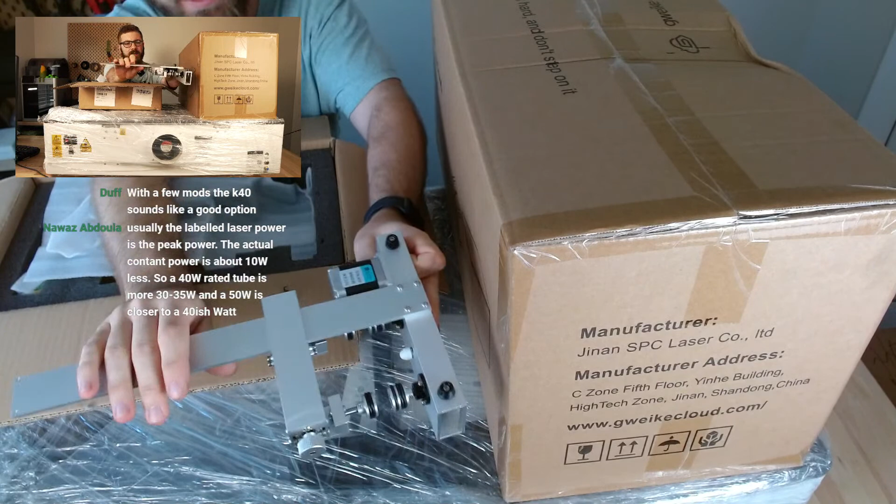Let's see if I go overhead. Nope, that won't work. Yeah, there we go. So, pretty simple looking rotary system—where's the adjust? Oh, here we go. Basically you've got an adjustable slide, so depending on what size tumbler you're using, and it looks like the wheels might be able to come further inward or outward as well. The rotary is something I'll test eventually, but I definitely don't plan on testing it today. Oh, it's actually interesting—maybe this is only a part of the rotary? There's basically what looks like a mirrored version of it in this box. I don't know, maybe they'll have a video guide on setting this up, but that's the rotary—we'll look into it more.

I'm hoping to just cut or etch a piece of wood or acrylic tonight. Oh, okay, this box is super heavy, this guy right here—definitely a team lift situation.

Yeah, so the K40 was a good entry laser, I think. I almost think the K40 to me is like the ANET A8 if we're talking 3D printers—it's not super safe, but it has essentially what you like. It has enough to get you going. Where is my... oh, there's my box cutter.

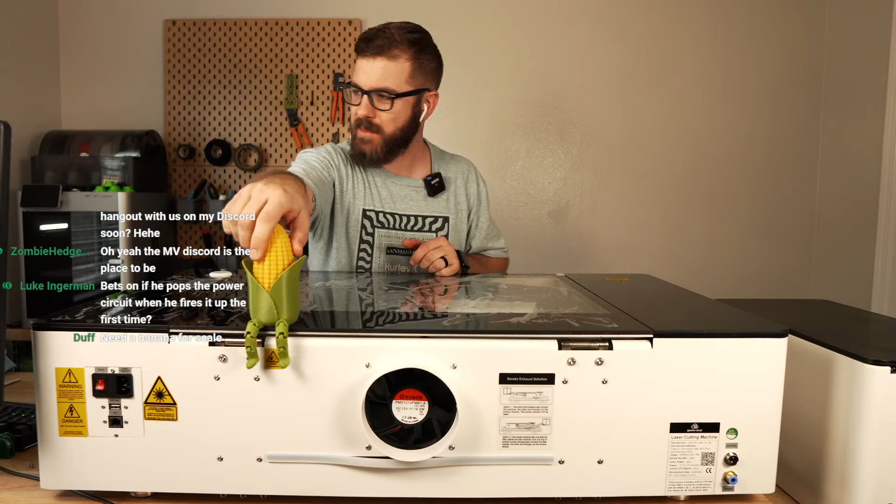Oh no, don't say that, Luke. I'm hoping that the electrical here is really good, considering that this place we're renting is fairly new. But I will say there are times when I run the 3D printers and the bathroom lights are flickering.

Okay, give me a second. The only way I'm gonna be able to do this is if I put stuff up here and go around, because I want to get the other camera to this side so you guys can see from my point of view, but there's just way too much crap on the ground. Okay, camera is coming with me, like that.

Perfect. Ooh, I'm glad I'm wearing shorts. It's hot. Okay.

Alright, so now, nope, that's me. Hi. What I want to do is have it go like that, and then you guys get a gnarly reflection of the light, but hopefully that will be a bit better.

Hey, what's up, BBs? What's the current rating for the power socket? I don't know, Duff. You can focus, yeah, I get really insane focus at nighttime. It's bizarre, it's been like that for a long time.

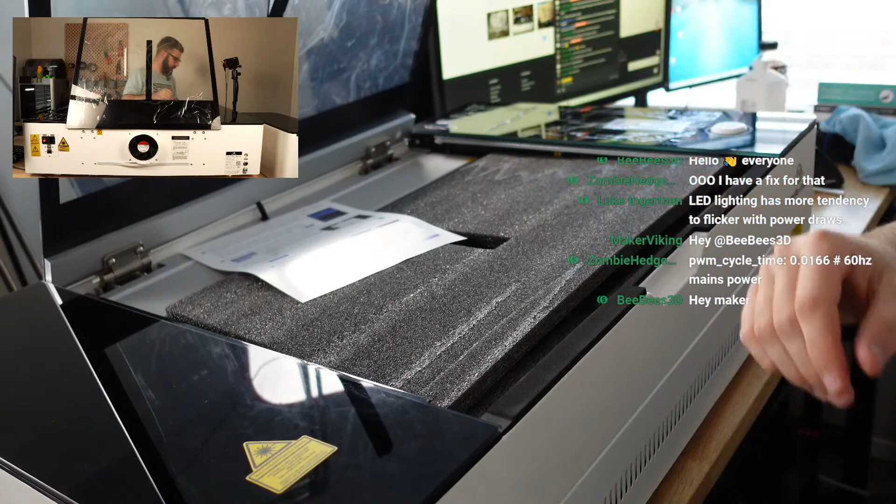Okay, so lifting the lid on this, pretty cool is that it comes with a built-in camera, so it's LightBurn compatible, and I wasn't sure if the camera would be, but it seems like it is, which is awesome. So what you can do, I've pretty much always with the K40 manually focused everything, or manually framed stuff, where you use either a second laser or your laser on a really low power so it doesn't etch, but you can still see a beam, and you kind of manually align things. But with this, granted we'll have to calibrate it in LightBurn, you should be able to place your material in the workspace, have it take a photo of the workspace, usually a pretty wide angle lens, and then overlay your...

Hey! What's up, Tripods? The man, the myth, the legend. He's Tripods, definitely has a ton of experience with laser things as well. Thank you very much, I absolutely will be up for a cold drink after this.

What did Maker say? You're welcome at any time if you should find the time. Thank you, Viking, I appreciate it. Heading home from the office, if you're still streaming I'll be back. Sounds good, G-Funny, drive safe. I'm sure we will still probably be streaming.

You basically take a photo of your workpiece, and then in LightBurn you can overlay your graphic or design, which is awesome. It makes it much easier to quickly align things without having to manually do all that. I think if there's no instructions here, this is just a quick start. We'll take this out so everything, get you guys closer. It'd be so nice to have a ceiling mounted setup, but I think this will work.

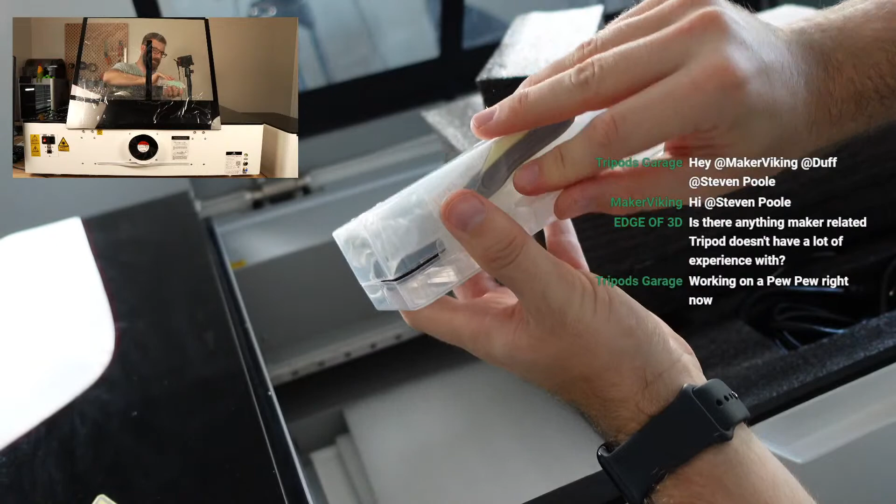You open it, it's very, oh. Okay, this feels backwards, but there you go. So there is, it looks like a jig, maybe for setting the correct height. That's what I would imagine, just an acrylic jig. We've got whiteboard marking. There is a focusing, 63.5 focusing lens assembly.

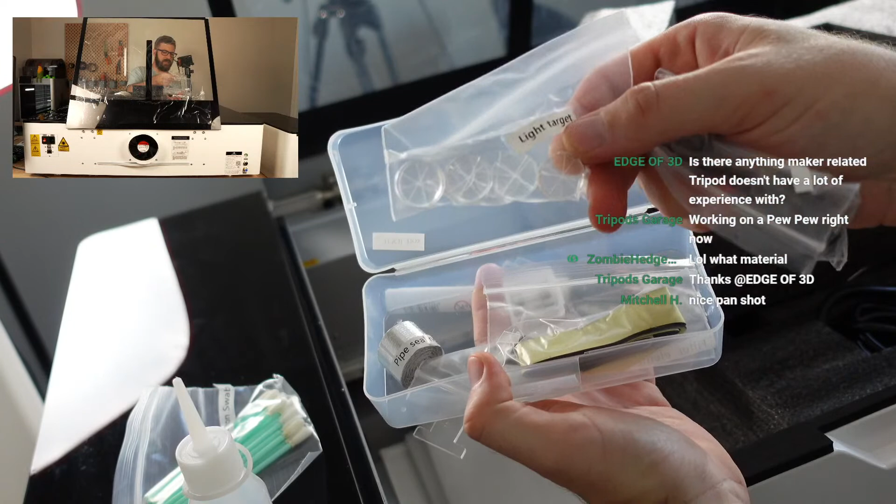Interesting, cleaning cotton swabs, which I'm assuming is going to be to clean any soot off of the lens. We've got oil, pipe sealing, spare fuses. What is this? Double-sided sticky, Allen wrenches, and ooh, this is kind of cool. It says light target, I don't actually know. I thought they looked like replacement lenses, but they all have etches on them. So I'm assuming it's for some form of calibration, probably, but we'll see in a bit.

So you get a nice little container of tools, which will go right here. Oh, did I pan with my head? Oh no, that's funny. One second, let me fix this camera. It looks like the tripod mount is loose, nice pan. It was moving, I didn't even realize it.

Yeah, the logistics of even, I wasn't sure if this was even showing up today.

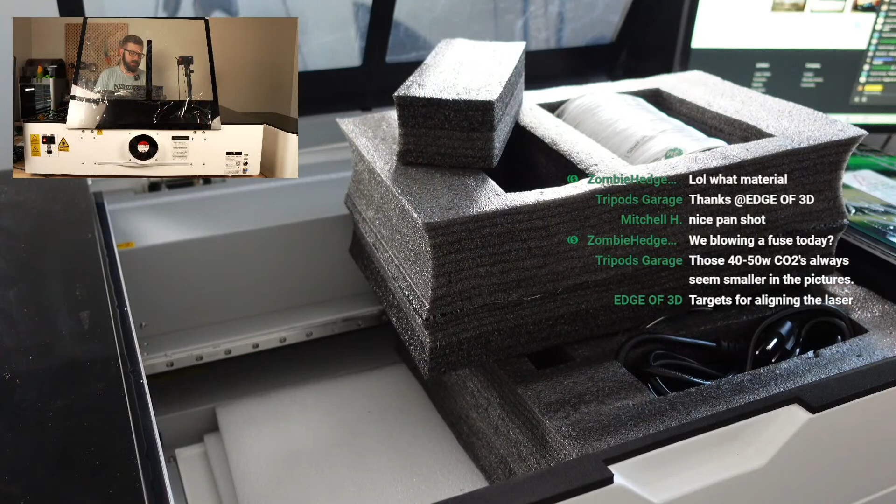Basically, targets for aligning the laser. Oh, interesting, okay. The only way I've ever aligned a CO2 laser was on the K40, and I think it was with painter's tape. That's right, Edge of 3D, you have a big laser, don't you? I used what I believe was painter's tape, if I remember. It's been some years now, and basically I'd tape it to see where the beam was hitting on the mirror, and then I had to adjust it. It was not a whole lot of fun, and I'm not even sure that I ever fully got it perfect, but it was functional, which is really what I was going for.

All right, so there's one clamp, another clamp. We've got tube, we've got Ethernet cable, we've got USB to USB. And we have got, this is, what does this say? Air pump, okay, so this is the air pump cable. I think that's all that's in here. Let me see.

Oh there is, okay, so let me get this guy out. Foam getting out, foam getting out. Okay, so inside, it's all linear rails, which is cool. So we've got, it looks like a single X, dual Y rails. You can see that there, well, maybe you can't really see it. There's grease, the rails are all greased up, but down below in here is the radiator for the water cooling loop.

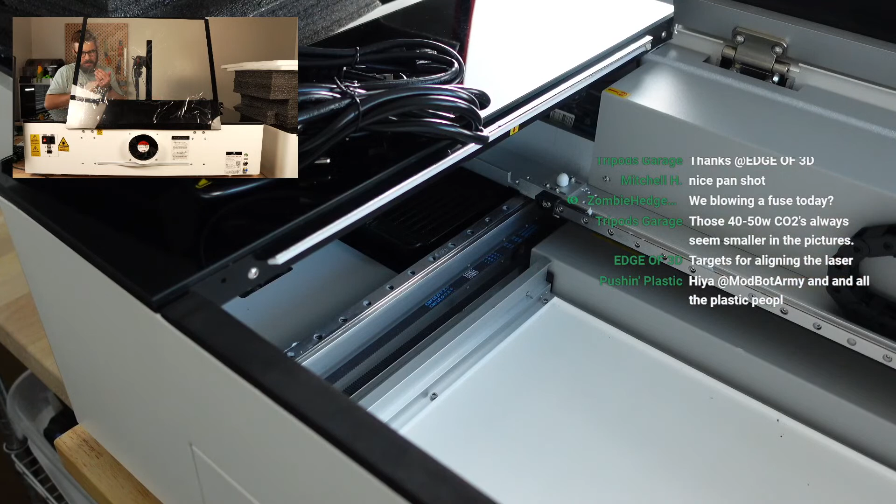Is there anything else exciting in here? Cable chain, stepper motors, pretty big beefy belts. The control board is, someone was asking about that. It doesn't look like there's an easy way to get to it, but the control board or controller is right there. I might be able to, I see a couple of screws on the cover of it, let me see. I'm trying to see. Okay, there's definitely no access on the outside. It looks like it's fairly unibody. Let me move this over here for you guys for a sec.

Hey, what's up, Cool Codes? Those target lenses are light years ahead of aligning with tape, just wear your glasses. Oh, interesting, okay, sounds good. I don't know that I have glasses for this, but if I'm not mistaken, for CO2 typically any glasses work, right, since it's an invisible light source. If I remember before, I just had like polycarb glasses, so I should be able to just wear any of my diode or fiber laser glasses.

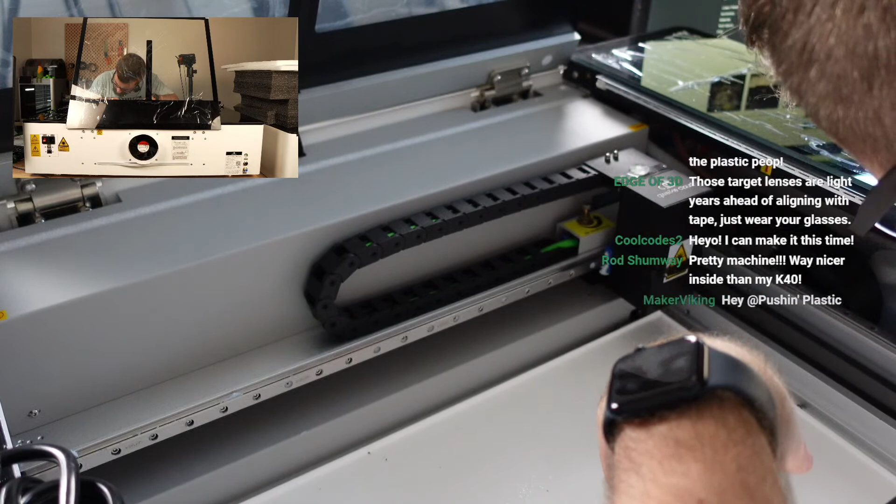So there's no, I was expecting some form of flash drive or something, I guess we'll go on their website and see. I do know from watching videos prior to this that the bed, yes, there's a big oval on the ground. I do know that this pulls out, I believe.

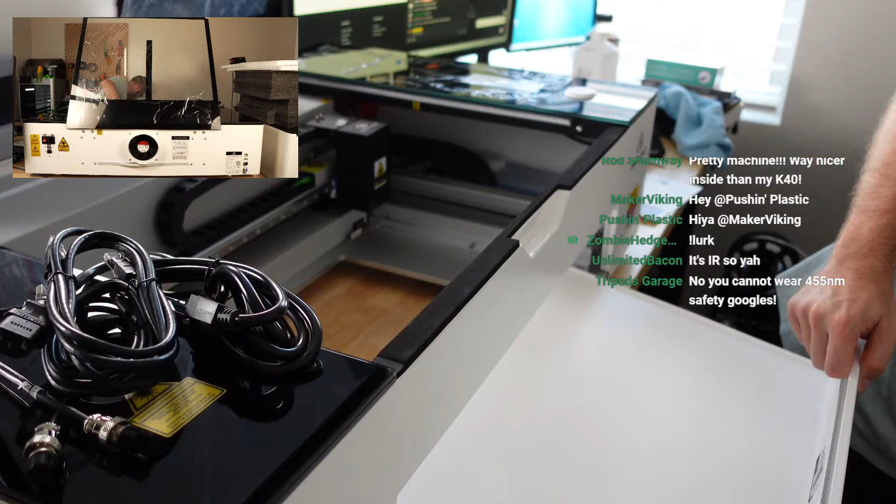Yeah, okay, so this guy slides out, and then the bed, which it does come with a honeycomb bed, pops in right here. Maybe this needs to come all the way out. Okay, so that slides in nicely. This slides in. Ta-da! We did it!

No, you cannot wear 455nm safety goggles, totally different. I thought I would get laser specific, but the cheap ones that come with diode lasers are adequate. Totally different spectrum, it's IR, so yeah.

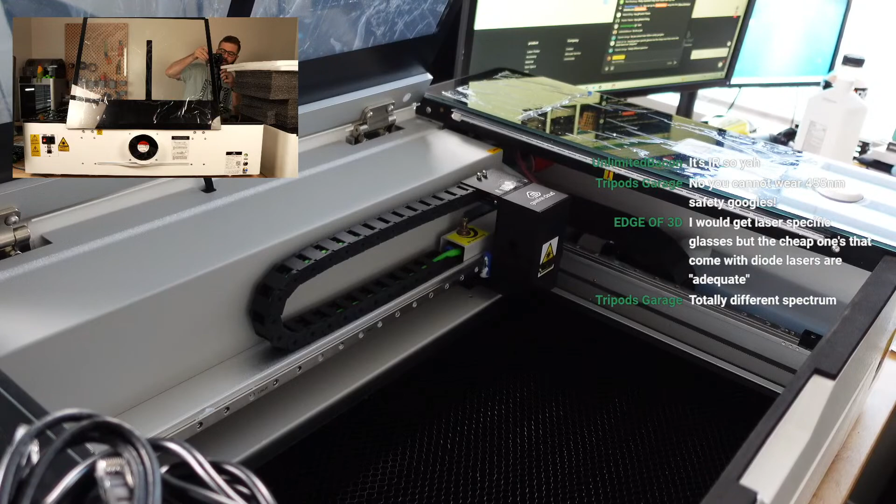I thought, because it's been a long time, I haven't really played around with a CO2 laser for years now. It's been in storage for 2 years, the K40. But from what I remember, everyone online was just saying standard polycarbonate safety glasses are fine. Basically, you just want something that doesn't have an opening on the sides because it's an invisible light spectrum, you can't see it, so you don't need any special shade.

And you basically just want a physical cover, which is why when this is closed, you don't need glasses, although this is just glass because it's not able to, like it would have to burn through this in order for it to get in your eyes. That was my understanding.

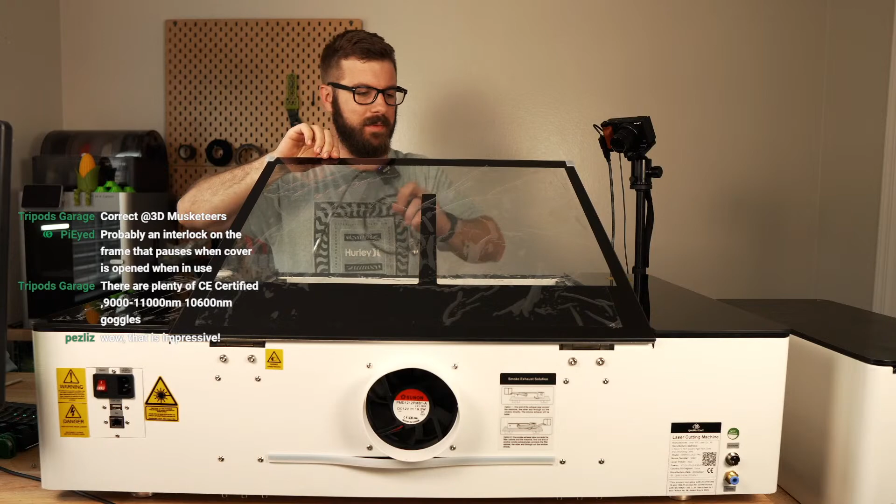I had a printer that showed up maybe a year and a half ago that was really large, and so I got it out of the box. All of the box and foam and stuff was in the living room, so I instantly had to get it out to the trash. I was going through the setup guide, and it was supposed to include a powder coated PEI bed as an extra, and a USB flash drive with some info. I thought they forgot it, but then I went out to the trash and it was taped to the bottom side of some foam. So I'm glad it was here, but that's something I've learned now - to really look through all of the foam, because sometimes stuff is just super well hidden.

Okay, so let's see if we can start. I'm playing around with the HDMI cable so I can get you guys on this side a little bit closer. I can't see chat right now, so if anyone's saying anything I can't read it, but okay, let me come around to this side.

Cool, I'm just thankful it was here because it's such a small thing, but it would have meant we couldn't really have done anything. Okay, let's go side cam. So we're just gonna quickly plug these two things in.

I did notice this beforehand, but the length you have is not very long, so this unit has to be right on this side. Because of how long this is, you just have to make sure you have a really long workbench or enough depth where this can sit behind it. Because the tube is gonna be connecting, even if you're filtering it outside, if this is where the air assist is, you need the side unit. So you just have to make sure you have a pretty long table.

Okay, come on threads. Is it me or is it the threads? All right, well that's about as far as we're threading it right now.

And then we do need to set up the exhaust tube as well. Hey, what's up, Zen?

So let's see, let's go desktop. Connection of exhaust port and air pipe - connect one end of the other pipe there. Okay, so it looks like it goes from machine to the top of that unit. So let's grab this guy.

Do I have a Phillips? Okay, I do somewhere, yes. Switch over here for a second.

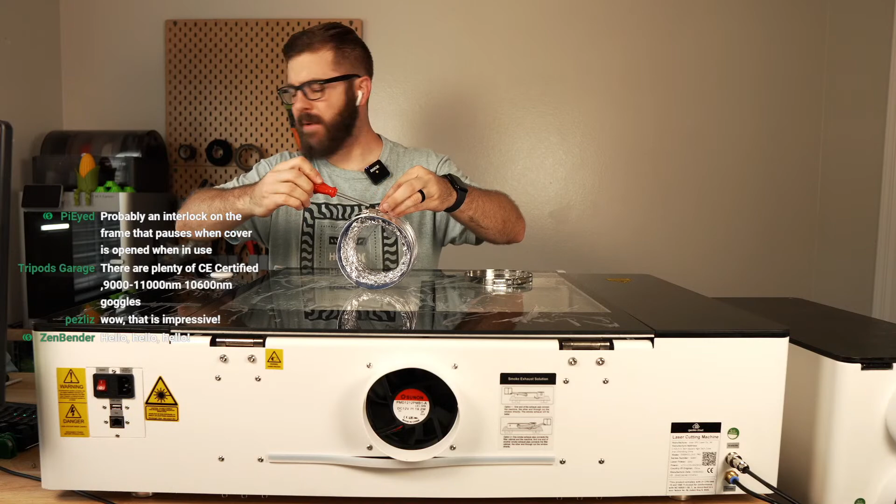Do you have, right now, tripods, do you have a CO2 laser? I know you have quite a few fiber and diode lasers. I wasn't sure if you had something like a K40 or...

Yeah, the side filtration's cool. The only thing is if you were someone that doesn't plan on using a filter, if you just wanted to exhaust it outside, you still have to use that unit beside it because that's where the compressor is for the air. So it does add a lot of size to it, but it's a really clean, very clean looking setup. And it is cool that it comes with it, because originally I wasn't sure if it was an extra cost or something like that.

Okay, let's put these clamps on really quick. CO2 is the only laser I didn't... okay.

Actually, I know you have quite a few fiber lasers. And I know you have a lot of diode lasers because I've watched a bunch of your diode laser videos.

All right, let's see, actually let's go. I need a remote almost to change scenes. Okay, so let's see if we come around to this side. It's like an obstacle course in here. Cool, that fits perfectly, as it should.

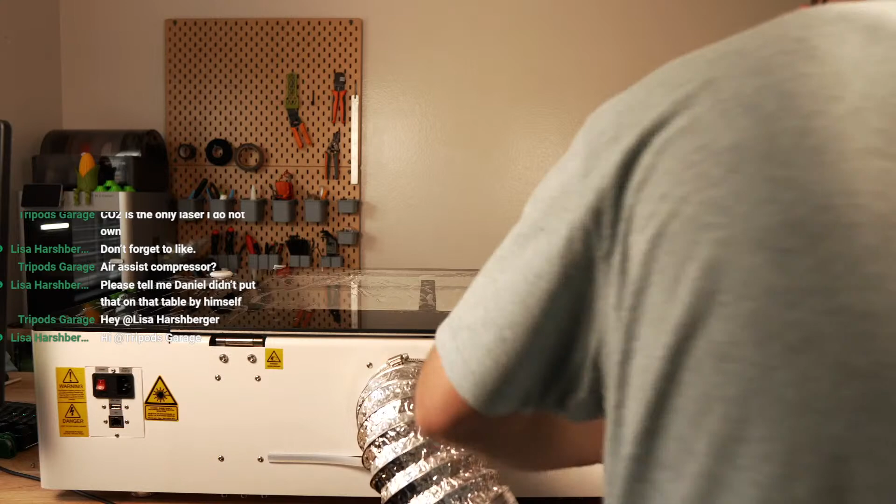When this goes out to the garage, I'll correct it a little bit more, but I already see right here, I don't think it was from me, I think it was from shipping. There's a tiny little hole in the tube, which kind of sucks. And then this is gonna go onto the other side.

Interesting, this other side feels like it's much smaller. Yeah, this other side's much smaller. I wonder if I'm using an incorrect tube. No, they're both the same.

All right. Oh. Let me switch you guys over to this camera. Woo. What's up, Steve?

Just, oh, that's a lot of tube. Just sweating and moving around this obstacle course. I wasn't sure this was going to be tonight either, actually.

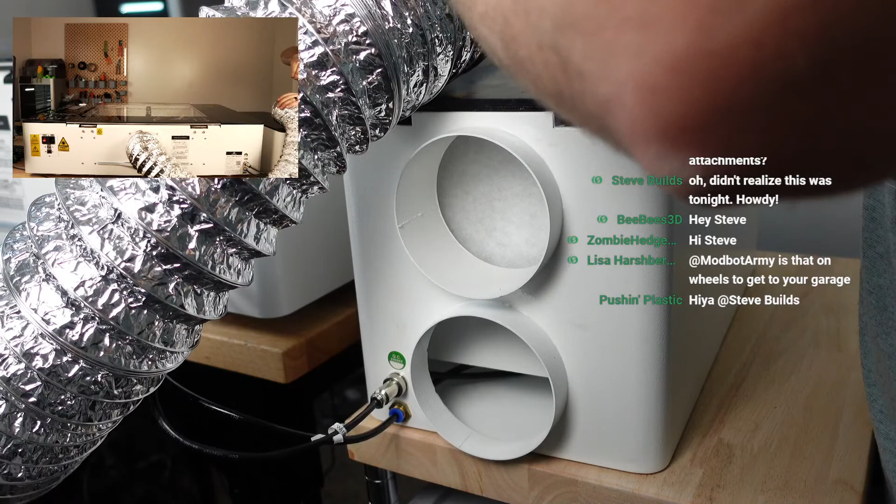And then today when the guy was coming to drop it off, why is this not... When the guy was coming to drop it off today, he called me and read off my address, and I said, that's not my address. So I don't know if it was the manufacturer or if it was the logistics company, but somewhere along the road, the address got changed, and the address that it was being delivered to was like the neighborhood up the road. It's so weird.

It feels like, is it my screwdriver? Could be this chintzy screwdriver. Okay, we're gonna rock with that for now.

When it goes to its final destination, I'll try to clamp it down a bit more. But yeah, I was very thankful the delivery guy called me this morning and said, hey, are you on a long gravel driveway? It's like, no, we don't have any gravel here. And so I would have been really bummed out.

Okay, so we've kind of sort of done that. Connection of exhaust port air pipe, connect one another.

All right, we're gonna power this on. Take everything out of here. Where are the, I just realized, like, where are the USB? Is it on the back of the machine? Oh, it looks like it is.

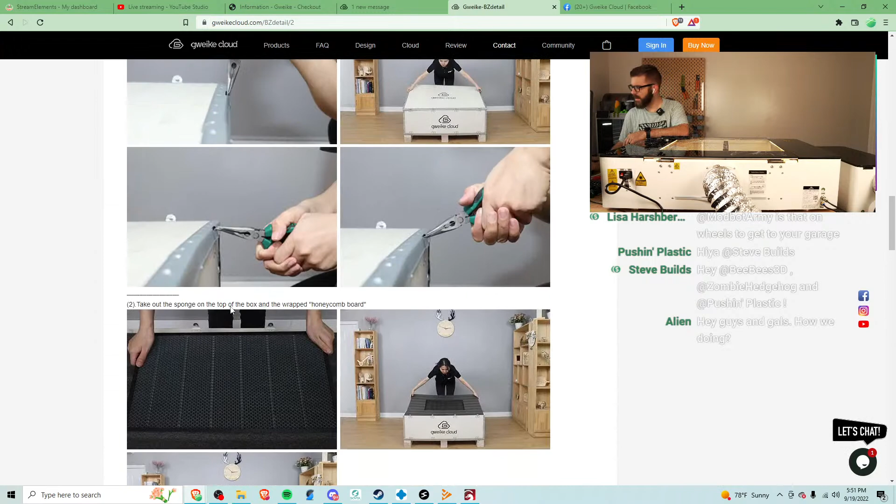I don't know how loud that is to you guys, but it is very loud here. Connect one end, plug in the power cord on our socket. Okay. Laser's moving.

I feel like that shouldn't just be on. Okay, your first prints and more. Yeah, the lights kicked on, the compressor kicked on. Everything's on.

Yeah, this thing is huge, alien. It weighs like just north of 100 pounds. It is a monster. I guess we can start using their thing really quick just to make sure it all works. So then I really want to see if we can get it hooked up to LightBurn.

Device, let the machine connect to the network. Actually, let me... It's weird to me that the instructions sort of stop there.

Unboxing and setup. So we unboxed it. We plugged everything in. And that's it. You just plug it in and then you're good to go. Unboxing and setup, learn by doing.

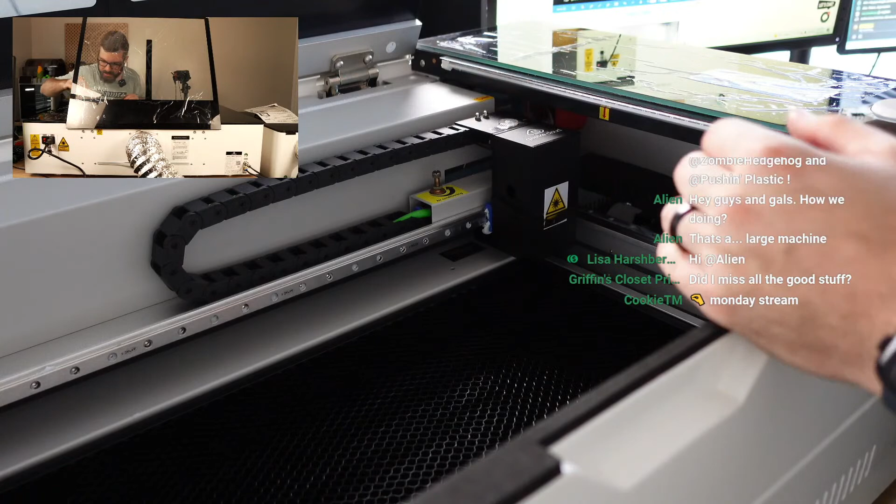Inside here, the things I'm curious about is there's no mention of a few things. So when this turned on, for starters, there is one of those little alignment pieces just taped on top of here. Okay, so that must mean they're saying they aligned it because it's basically charred. So I think that's what they're saying, is that they've already tested the alignment for this, or it was aligned at least before they left the factory.

Yeah, so if you look at the target, there is, it looks like a mark right in the center of the target, or roughly the center of the target. So that's fine to remove, I think, hopefully.

The things I'm unsure about is there's a switch down here. Let me see if I can zoom in for you guys. Okay, there is a switch down here that says air conditioning. So I guess it's air assist, I'm assuming. They're calling it air conditioning, but this is, you can adjust the flow through this right here. So we've got it, I guess, fully open. And then there's also some form of a digital reader here.

When this turned on, it output something. So let's turn it on again, I suppose. Let's flip the switch. Okay, so it lights up. I don't know how well you can see it. It says ZYE, Xi, laser power. So maybe it's a power reading, like it tells you the power output.

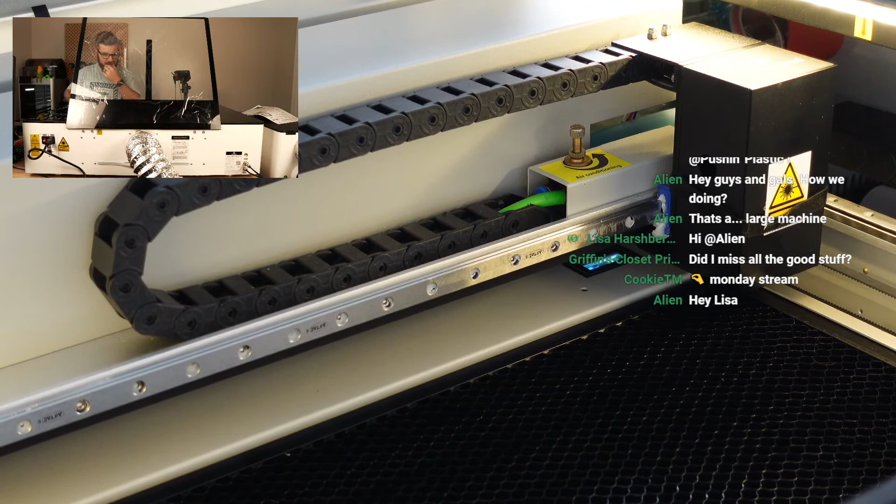Yeah, super loud. Oh, there's also foam still, foam packaging inside here. Okay, so all the foam's out. But yeah, I just feel like it shouldn't be turning all that stuff on until a job's running. At least that's my assumption.

So let's try it with their stuff really quick here. Let's use the computer and go to Gweikecloud.com. I'm wondering if once it connects to the software, then it'll be smart and not just run the air compressor.

Hey, what's up, Jerry?

Then it says sign up for Gweikecloud. So yeah, we'll start with their cloud stuff. Email. Don't have an account number. Create one now. One second, y'all.

How loud does it sound for you guys, out of curiosity? Because I know we have a noise filter on here, I think, from when they were doing construction.

This code will be active. Email code error? Oh. Don't play with lasers, alien. Okay, so it requires you to get a code to your email. I'm gonna grab that really quick. Oh, it just came in. Cool. Code, cool, confirm.

Gweikecloud, air compressor always on. Oops, I pressed a button. I pressed the button and the laser's moving. This is going great, as long as it doesn't start actually engraving, but the button did a thing.

Okay, I'll have to find out about that later on. Let's just plug it in. Let's plug it in and see if we can get LightBurn running on it.

All right. USB cable. Nope. And USB cable. Okay.

Well, would it turn off if I close the valve? That's a great question. No. I mean, it might — what I think it's doing is it's preventing it.

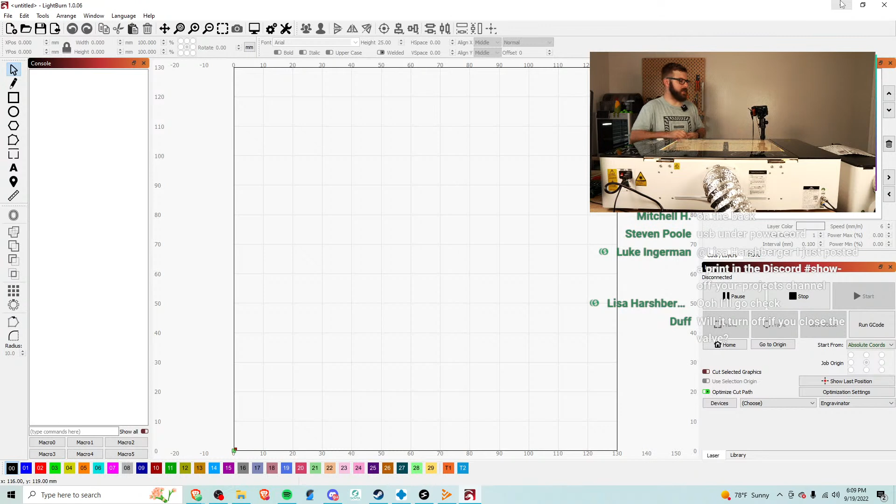Oh, these clips also need to come out. I think it's preventing it from having nearly as much air coming through it, but it doesn't actually flip the switch. I feel like there should be a way where when the laser tube is going to be kicking on, that's when that should all kick on. But maybe it's not the case.

Okay, so I don't think that I have — let me see, let me update to the latest version. I don't think I installed the driver. So this has a — if it's showing up as a... oops. If it's showing up as a Ruida controller, then let's see. There's a driver that I'm probably gonna have to install, and I don't think I've ever done it because I haven't had any CO2 lasers.

You could— I probably could sleep on this if I curled up real small. All right, so installing the latest version, and then at the very end of it, install FTDI serial driver. That is what we need. Yes, extract.

Cool, all right, hopefully this just shows right up because I believe... Oh, interesting, they have a driver. Oh, maybe I'm doing it wrong then.

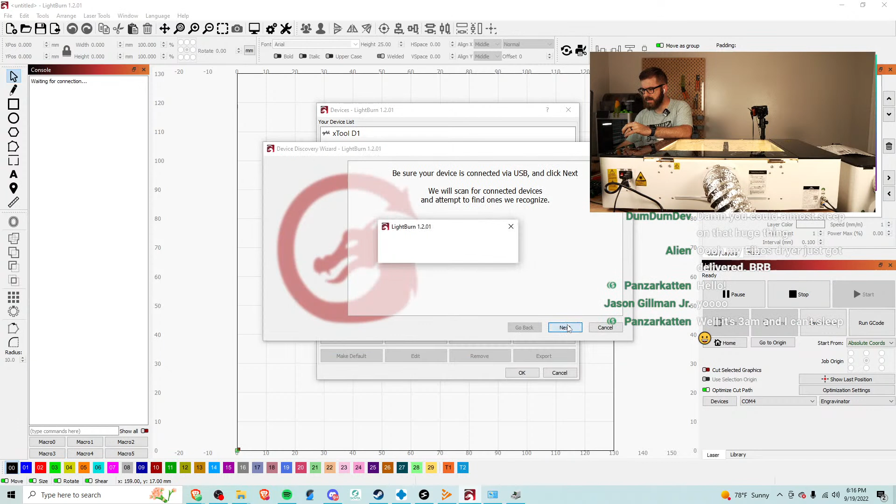Hey, what's up, Jason? Okay, find my laser, next. It is not finding my laser. Why? Let me try a different USB port.

Oops. USB. Really looks correct, I don't know.

It's 3 a.m. Oh my gosh. Yeah, I'm trying to get it set up.

For some reason, I don't know why LightBurn's not picking it up. It looks like it should show up as a Ruida controller. I have it plugged in via USB.

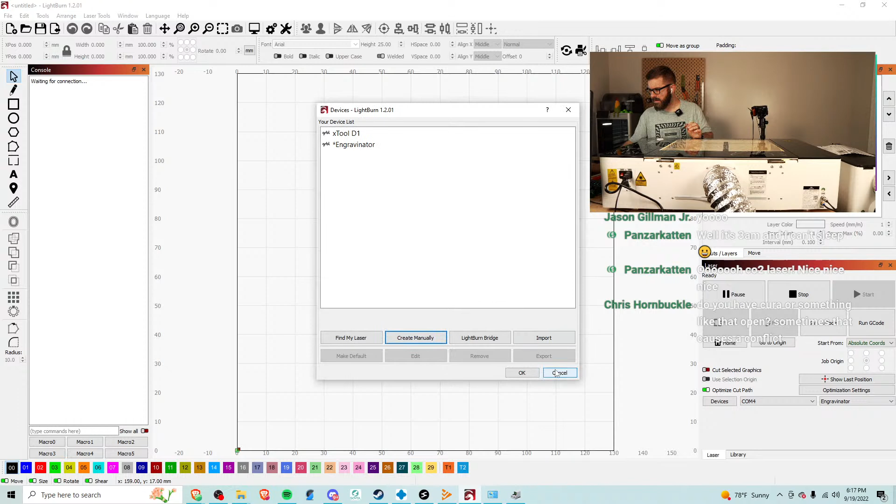Oh, you might be right. I have a bunch of stuff open. Let me see here. Close, I have a bunch of, it's all resin slicer stuff. Let's see, I'd rather not close that one if I don't have to. That's a really good point. Let me see if I close up this stuff.

Did your dryer come with a power cable? Mine didn't, it's running off an external power brick. Mine came with a power cable. Mine definitely came with a power cable. It was just a cable.

I don't remember it being. Was it a brick? It's in the garage. I can check after if you want. Or is it just live voltage? Yeah, I don't remember mine having a power brick. I thought it was just live voltage to the box.

Okay, so this is not working. One thing I'm curious about then is my laptop definitely has LightBurn on it as well. So I want to see if it's something with this computer or if it's something with like a driver.

If I can't get this right now, then we'll go back to trying their cloud. I'm sure once I get it, it'll be simple, but I actually haven't set up a CO2 laser in LightBurn. Let's see if this works.

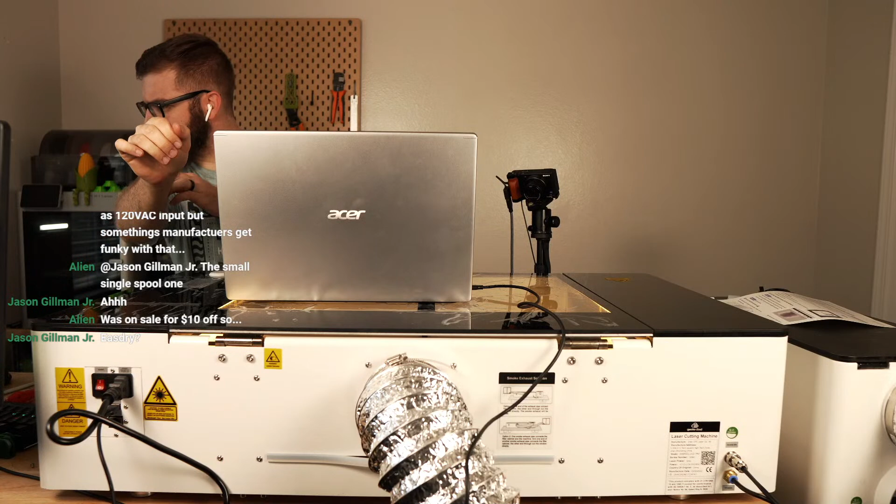They got rid of the power cable. No, it should have. I swore it came with a fairly standard, maybe one of the power cables that has like two prongs on it.

Okay, so this is not ideal. Let's just see. Okay, so let's install.

Okay, we're installing the driver. All right, will it find it?

Find my laser. Yes. No. Okay, so I don't think it's LightBurn then. I think it's either the machine or something driver related. I'll have to play around with that. I'll have to screw with that on my own then.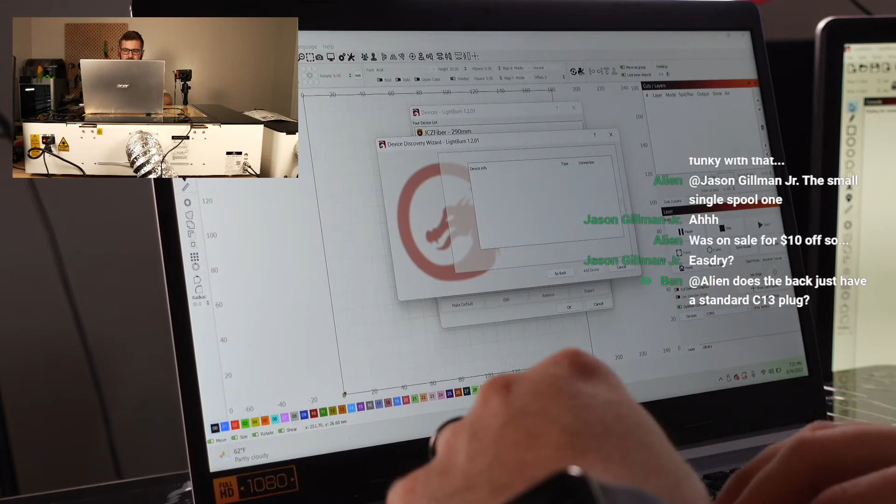I'm gonna go back to the drawing board, which was seeing if we can get this thing on the Wi-Fi. So let me go, let's go back to here for a second. It's been an adventure.

Okay, so let's go back to the cloud. There we go. I'm gonna remove the device that's already on here. Okay, so I removed the device. I'm gonna add it again. Let's see if we can get it to connect on Wi-Fi so we can at least use theirs right now.

Device. Next. Okay, next, hold down the button for 5 seconds. Okay, we got the flashy thing going on again. Please turn on the Wi-Fi of your laptop or tablet, search for the device. When the device display is connected, the Wi-Fi connection is successful. All right.

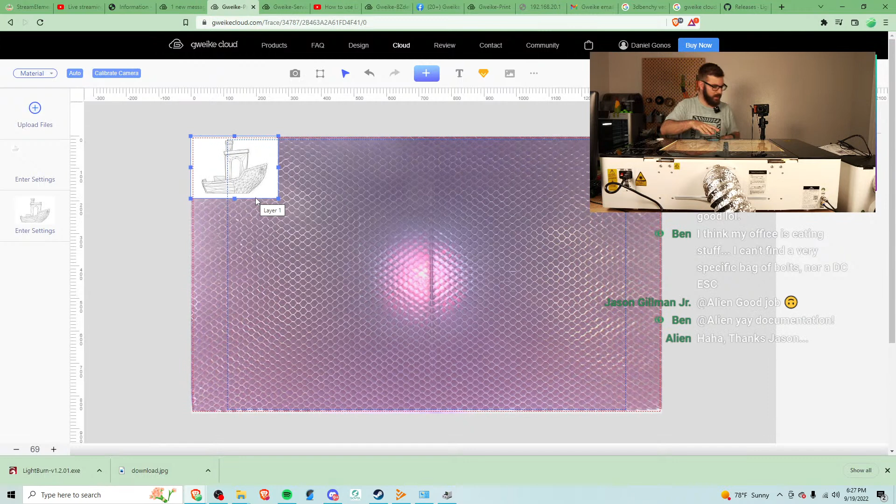The manual shows just a regular cable from the wall to the two prongs, so it's all good. Oh nice. Okay. So,

Material — I guess we'll try their material then. Some of their material.

I will destroy any and all USB cables that are power only. They are an abomination. Yeah, yeah, you're right. Flashcards too, I've had my fair share of issues with those. I'm not sure that's the case here, but it's weird to me.

Because I do video work for LightBurn, but before that I was doing some tech support work, and the primary issues were like the driver wasn't installed or something like that. So I don't know. I guess let's start with cardboard.

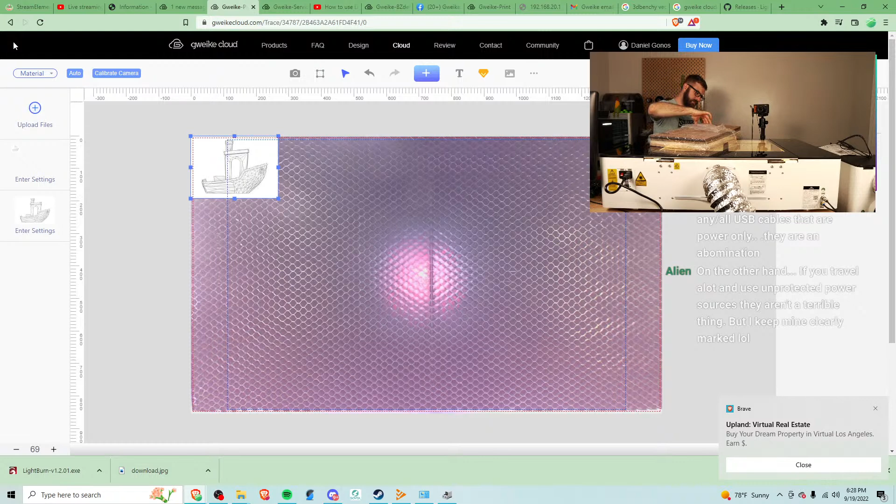There's actually some nice acrylic in here. I saved the acrylic from the switch wire because I got a replacement one. So that's what I'll probably use, and use this because this is nice, like full sheet acrylic.

Okay, so similar to Glowforge, if you use their material, there's like QR codes and all that. I mean, it's pretty simple to set yourself, but I guess if you're just starting out, it could help.

Let's see, so we are going to open this up. Is it a live feed? No, I wouldn't imagine so. I will say one nice thing about their material is that it's the exact size of the workspace.

Okay, so let's see if we go material, auto. Disabled — why? Oh, scan error. Oh yeah, cool, so it detected it.

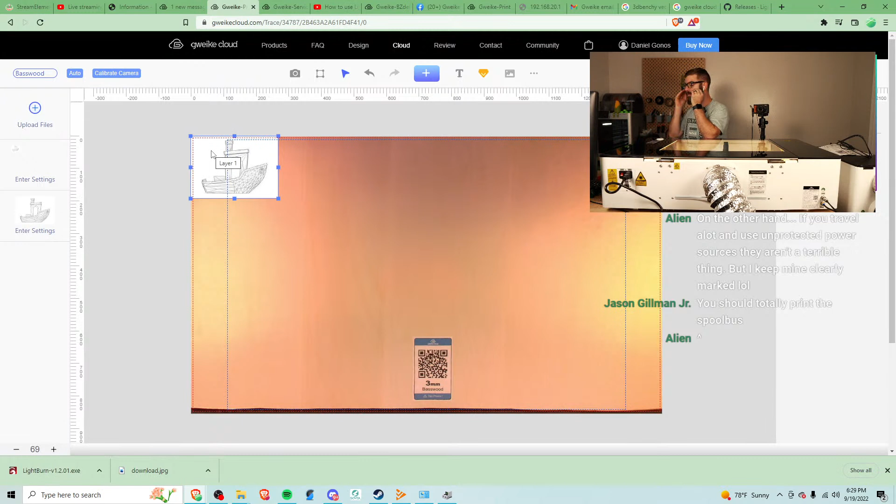Oh, the spool bus, that would be pretty cool. Yeah, we can do that. I mean, I don't know how to use this software. The primary laser software I've used really is LightBurn.

So let me see if I can find — hold on a second here. We can try that, we'll see if we can engrave it and then cut it out possibly. So if I go, I think I have it under my drive, and then I think it's in this folder, under my merch folder.

Yeah, there we go. I've got a PNG, let's try that. Cool.

Okay, so I guess I would imagine you're supposed to remove the sticker at some point. We can leave it for now, but upload files, web use. Oh, there he is, there he is, there he is.

Wait, how do you — okay, I was like, how do we maintain... Okay, let's try, like, I don't want anything huge. Okay. How do you do any of the things?

Doesn't really — okay, so upgrade member. I don't see how you just tell it what you want. Oh. I hit print. I don't understand, upload successful. But how do you preview what it's gonna do?

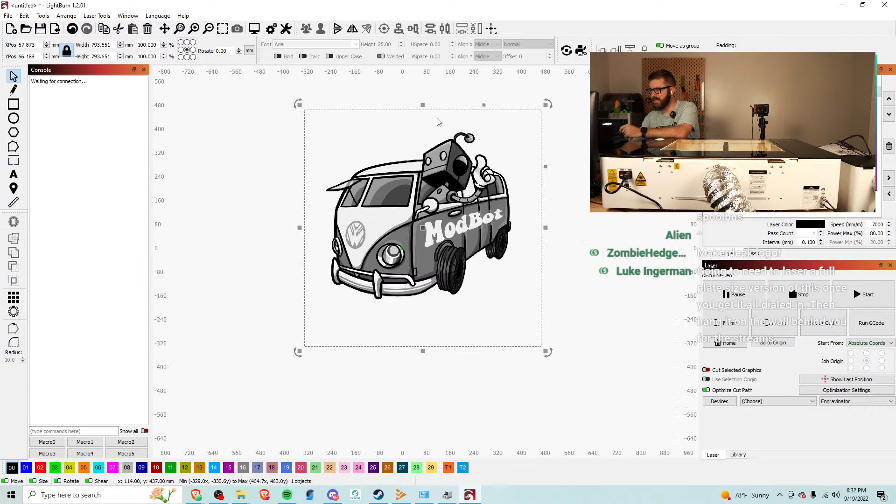I mean, we can just try it. I don't know what it's going to do. So speed, power, cut, engrave. I have no idea what it's going to automatically do. There's artwork.

Align. Is the print area the outline box? Oh, that's a great question. I don't know.

I say we just stick it right here, hit print, and see what it does. Yeah, I say we just send it. It knows the material because it scanned it. Upload successful. Okay, so I'm pretty sure all I do is smack the button and magic happens on the machine.

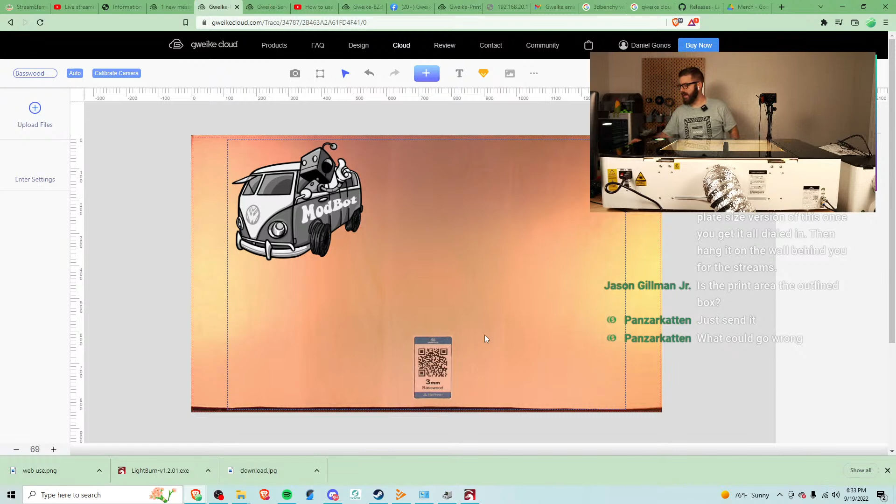I'd say there's not a whole lot of control compared to what I would like, which is another reason why I want to get it set up with LightBurn. But let's see what it does. I'm curious. Okay, let's go side cam, let's smack the button.

Magic time. Oh, cutting mode. The drawing cannot exceed the red frame. Okay. It's doing it, it's doing it. Okay, so it's cutting.

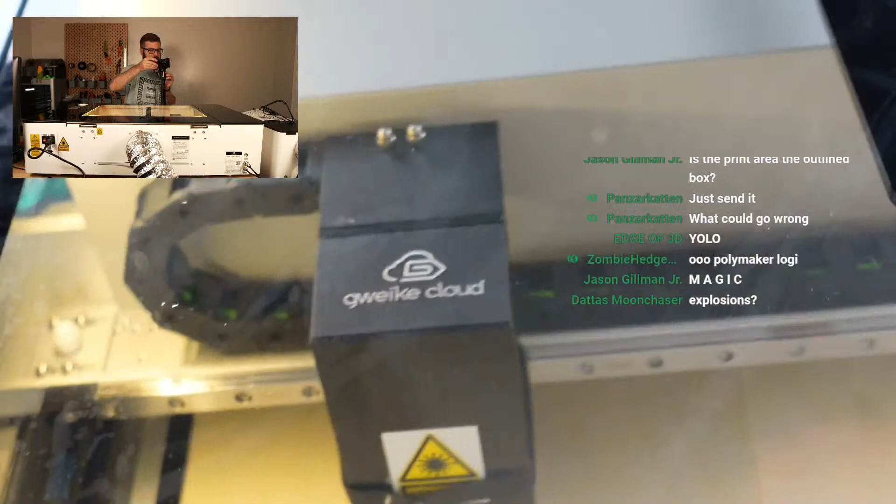It's a lot of smoke. I love it, you guys can't see this. Wait, that's all? What? That's all it did, it created a single line. What?

Hey, what's up, Dattas? What? How did that translate to that? Well, the thing that I'm clearly missing is, where's the output? Don't look in the laser with, yeah. I don't understand. Review? No, that's actually a custom review. It just doesn't make any sense to me. Like, what?

Why? Oops, no, I don't want to move the file. Print. Oh, okay, okay. Oh no, so it updated the image, right? It sees the cut that it did. Oh, okay, I think I... So can we delete? No, how do we remove...

So it seems like this is like its layer setup, possibly. And so it's set to cut when we want to engrave. Okay, so now it's set to engrave. Okay, let's try it again.

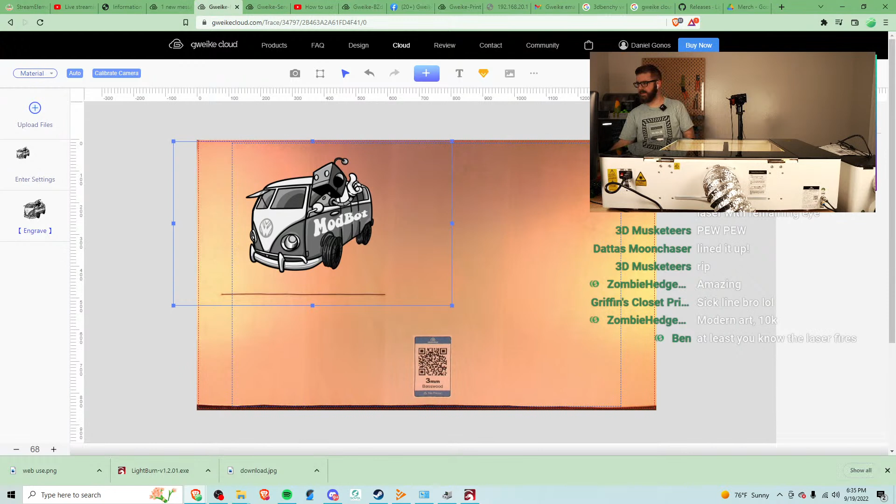I don't understand why the cut did what it did, but let's see. Let's try it again, so hitting the print button. Okay, it's flashing, I think that means it's downloading its project or whatever. I don't like that there's no preview. I don't like that there's no output preview.

I use that, I preach to people to use that in LightBurn because it'll save you from doing this, like drawing a line when you think that you're engraving an image. Okay, upload successful. Okay, so I believe all that we're going to be doing is smacking the button.

I'm going to go, nope, that's me. Side cam. Button smacked. Magic time. Okay, it's definitely doing a light etch.

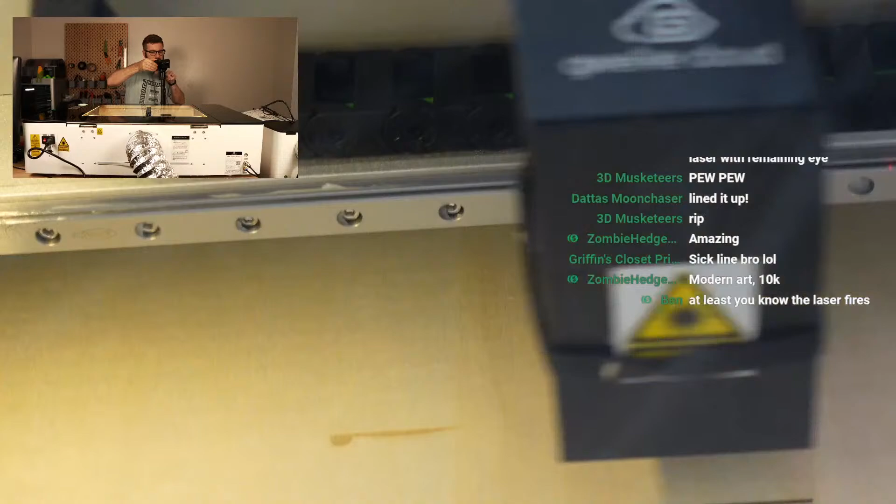Looks like it's just filling it in one shade, possibly. Ooh, that is tripping out, huh? Let's see, let's go.

Maybe it's doing multi passes. You could be right, Alien. I don't know, I mean again, I'm sure it's something. I've got to be doing something wrong.

I don't see how anyone would just upload an image and hit fire without being able to see some sort of preview of what they're going to output. It's really strange to me. Like, language, print, says that it's active, plate versus rotary, image type, upgrade member, text tool, graphics library. I don't see any details, really.

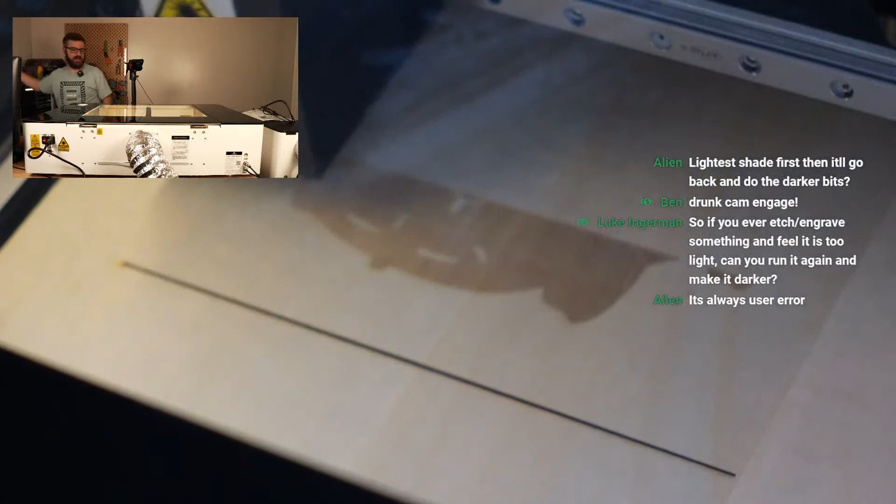Maybe. I mean, I thought, to me, it's very odd that it would default. Well, again, we'll see what it does if it does a second pass, but I would have thought that it would engrave it in like a grayscale or something like that. Well, this just seems like it's... hard to tell what it's doing actually.

I'm trying to figure out how it's picking out what part to do light and what part to do dark. Like, part of the grill is light, I guess. It looks like the headlights aren't being engraved, like it's leaving those light.

No, this is basswood, this isn't cardboard. No fires. Thank you, Edge, I appreciate that.

Yeah, the goal, I mean again, I didn't even plan on running it with their software. I just don't know what's going on with the connectivity, and I don't want to spend a ton of time troubleshooting right now. I'll definitely report back on whatever the issue is. I'm pretty sure that my account at LightBurn has like DSP, G-code, and fiber laser, but maybe because I've never used CO2 for work, I don't have it on my license. I don't know.

I do love LightBurn, and LightBurn is awesome. Even before I was working with LightBurn making videos, LightBurn was what I pretty much instantly swapped to with my K40.

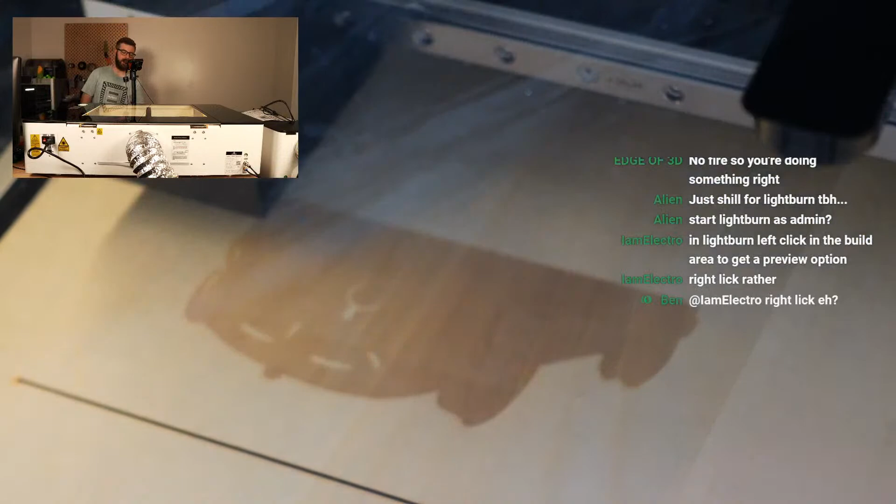No, I know how to do the preview in LightBurn. I'm saying that I'm not able to get Gweike Cloud to work. I think after this completes, we'll try a single cut pass of a square to see if we can cut through. Then I might try to get LightBurn working as a final thing for the night, because that's ultimately what I want to do.

Right click. On the top toolbar, you can also, I think it's control P, that's the shortcut for the preview.

Very weird etching. Again, I don't understand the couple of small fragments that it didn't engrave. I don't know why it chose not to engrave those parts.

I'm absolutely gonna wait on the acrylic until I'm familiar with the machine. I'm glad we chose the basswood and not the acrylic, because acrylic is surprisingly expensive. I've bought some for projects and I'm always like, ooh.

I definitely smell smoke, and I smelled more when it was cutting a pretty aggressive amount, but I do think the filter system is making quite a big difference, considering this is an 8 to 10 minute wood engraving indoors.

Yeah, I think this is it too, which is a bummer. I just don't know, how can there not, when was this? Photograph, trace. Okay, so there is an image trace.

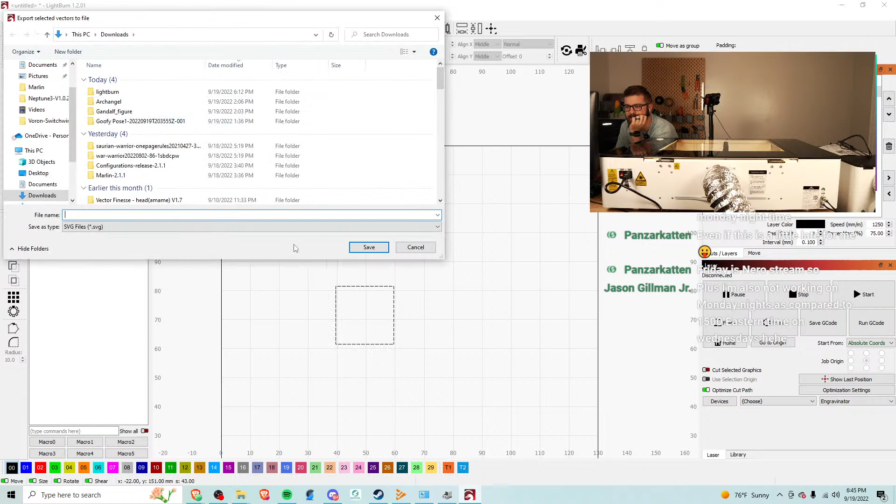Okay, is there a way to just draw a basic shape? It doesn't look like there is. Let's try, I'm gonna try to do, well, we'll use LightBurn. Let's do just a small, I'm gonna try to cut out a square. So we'll just do a 20 millimeter square, file, export it as a vector, square cut.

Then we will, even though it's, yeah, well, it's a good thing you don't sleep, Panzer.

I couldn't do, the only reason I'm able to do Wednesday streams is because I don't work Wednesdays, but I work today, so 6 o'clock my time, or no, yeah, 6 o'clock my time is the earliest I can stream.

Okay, so let's go back. Where is our... There we go. So let's upload a file, upload the square cut vector, and let's see if we can... I don't understand.

Okay, so we want to cut this. All right, let's see if we can cut this square out. Imagine working. Yeah, okay, let's see if it just cuts it.

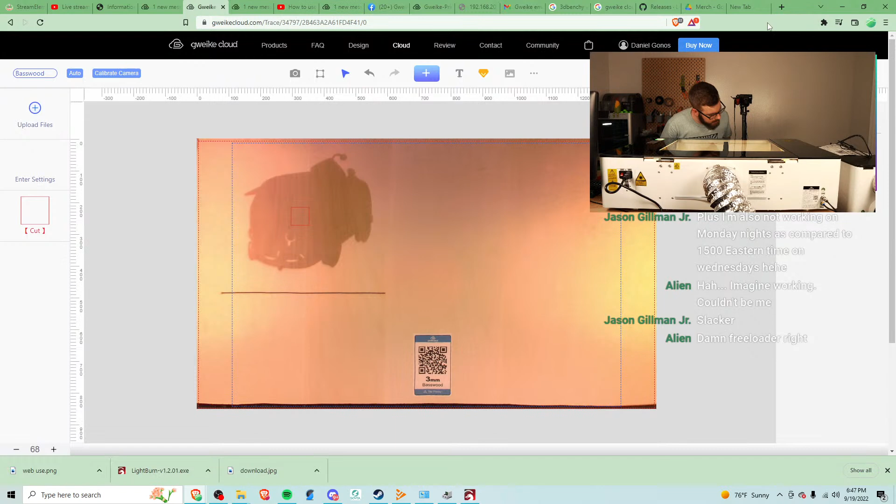I think that line looks like it did cut straight through. But I just want to do a small cut. I don't want to do any big cuts in here because upload was successful, it's gonna fume.

Side, all right, here we go. Smacking the button. It is kind of fun to smack the button.

Wow, it's sparking. Yeah, that definitely cut through. I saw it sparking.

The dogs are freaking out.

Let me give it a second to try to clear out the smoke. Okay.

Yeah, so the light turns red on this when you open the top, so I'm assuming it's basically deactivating the lasers.

It cut through that with, I mean, granted it's a CO2 laser, but it cut through that really easily. Let's zoom in.

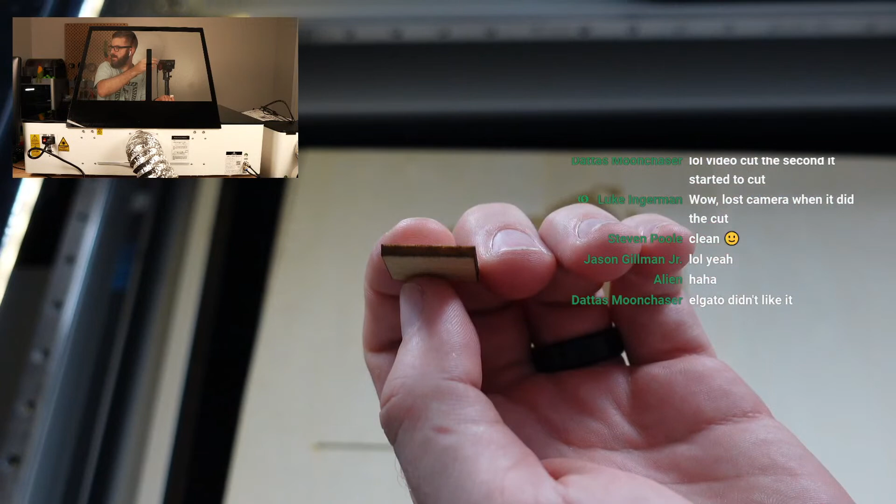It's a clean cut. It looks really good. Like no charring at all.

And out of curiosity, let me see here if I go... Oh, trippy. That's trippy.

Let me redo the camera here.

Or maybe... disabled scan error. Why?

Wait, what camera cut out? You're saying that the side camera cut out? Scan error. Why? I don't understand why.

Do I need to press the button again? Oh shit, it's moving. What? Oh, it ran the cut again.

That was not the answer. I'm trying to figure out why. Oh, that sucks. Okay, let me do this one more time for you. If I can figure out, I don't really understand what's going on with the camera now.

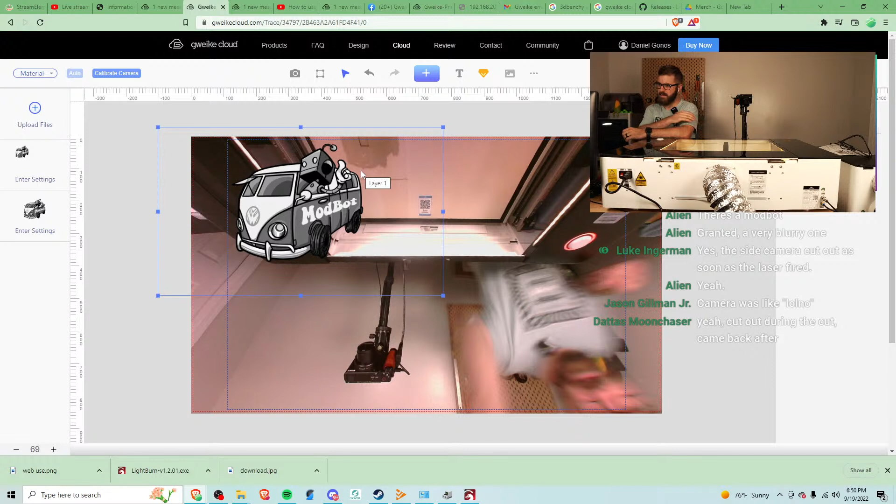All right, click on auto, waiting for a sec here. Scan error. Why? Oh, yeah.

Yeah, I'm definitely not crazy about the cloud stuff at all.

It says ready. It's weird that it brought the spool bus back, considering that's not what we were doing. And it's also weird that the camera... photograph, is that what I'm supposed to do?

Yeah, I know this is rough. This is definitely rough.

Okay, let's go. Oops. Yeah, let's try the square cut again.

Okay, now it magically worked. I don't know, I don't know. All right, so where is our square?

It's not even here. Okay.

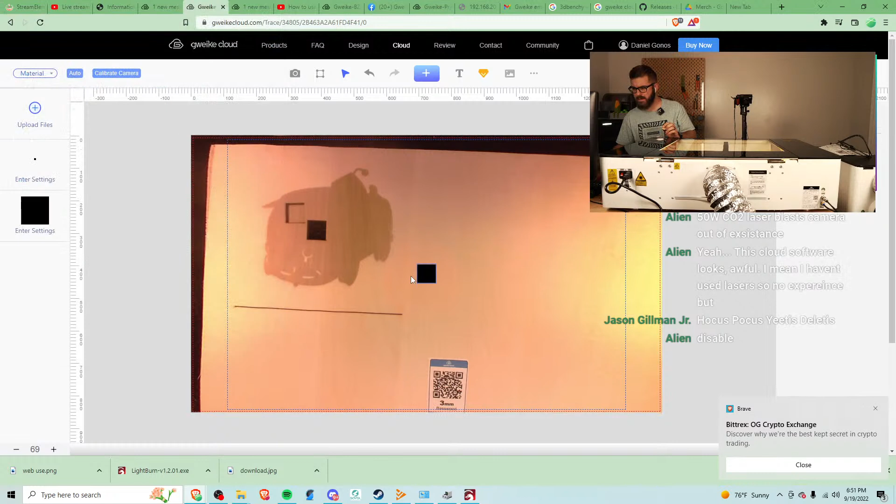Okay, so it is running at 90% power though. Confirm. Print. All right, let's see if I can show you guys the...

See if it doesn't cut out again. Smack the button.

Cutting mode. The drawing cannot exceed the frame. Yeah, I get that.

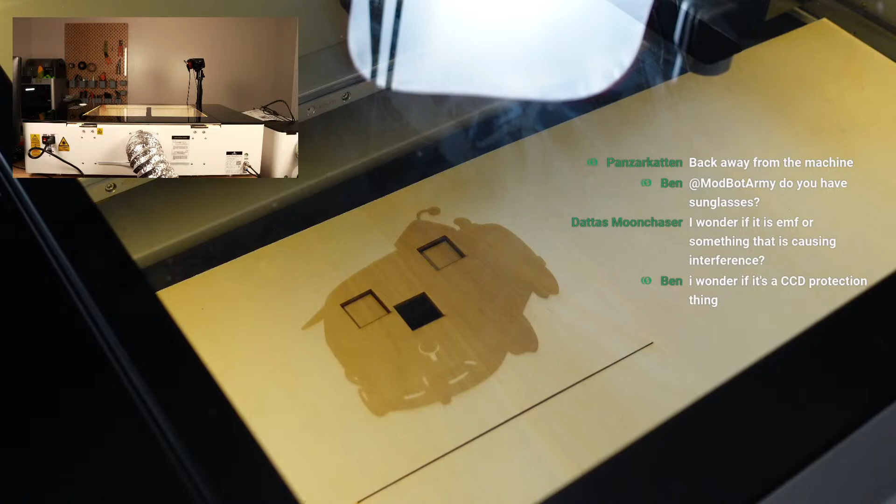All right. Yeah, no, I have a... it's not my license.

So that leaves it with only a couple of things, which is a bad USB cable, which this is just USB to USB, which I don't know that I have any USB to USB cables.

I'm gonna try to plug it in the front here. We'll try one last thing here.

Really bizarre to me. Let's see. I'm at least excited we got to see that it's functioning, which it should be, but...

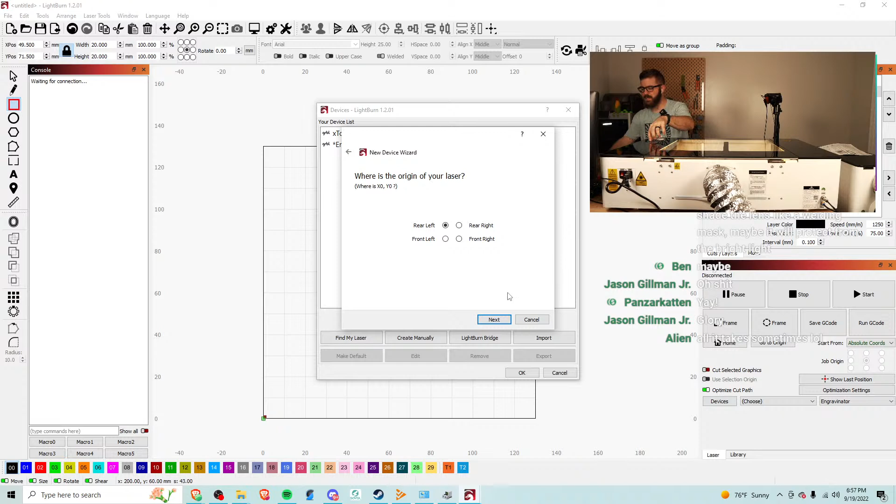That was bizarre. That doesn't normally happen. I mean, again, I guess I changed the USB port. I also wonder if perhaps when you get this machine, the first time you get it, you have to register it. But that doesn't make sense, because this is running locally. I don't know. I do not know.

Okay, rear right. Sick. Oh, that makes me so happy. Okay, rear right. Next. Finish. Awesome. Okay.

Now let's move to Gweike Cloud Pro. Laser says ready. Oh, beautiful. I've actually never set up a camera with LightBurn, because again, I haven't had a CO2 laser with the camera. Don't wiggle any cables.

But what I do want to try is importing - doesn't need to be that big, it's a little aggressive.

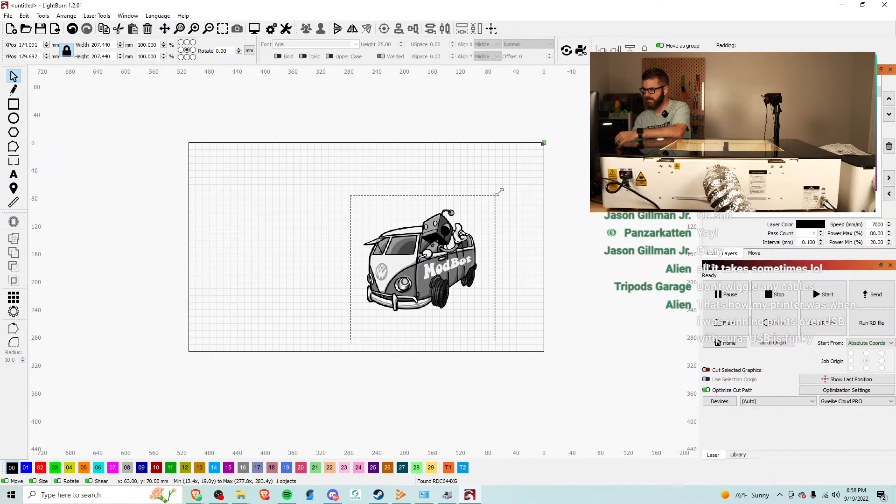Okay, so speed - millimeters per minute. We want millimeters per second. Okay. Power, 80%.

Usually I'm fine with USB because, like, the Galvo I run works over USB. All the diodes are over USB. It's not an issue normally, but yeah, you definitely want a decent cable. And I agree, wiggling - I kind of just want to run this.

Oh, it's running. So move this up. Put this here. Okay, so let's go really small for right now. All right.

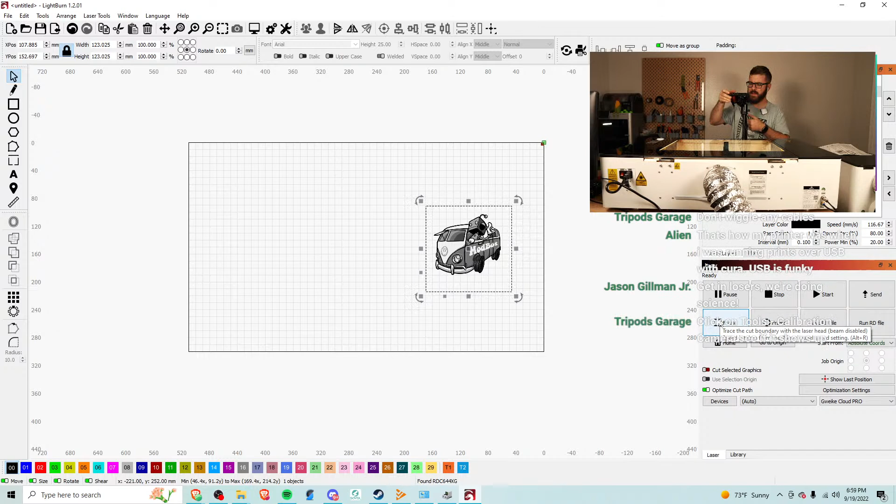Oh, laser tools, right? They moved it, or calibrate camera alignment. Cameras or work area. Yes. Okay. No. Camera is not showing up.

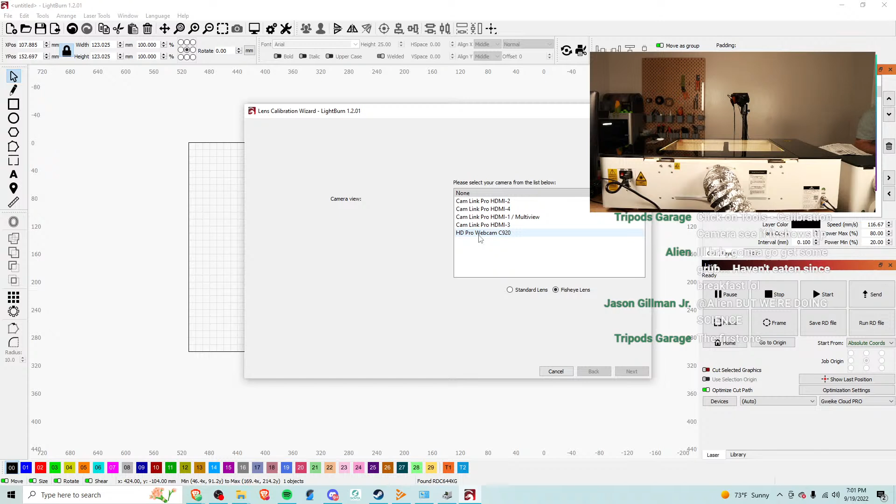I remember, so somebody had stated that there's a special USB that they supply that lets their camera work with LightBurn, and I wonder if that USB would have been in here with this inline fan, because this was like a thing that they added after the fact. Let's see, no, not there. Oh. This is totally it. Camera line. Oh snap. Okay, so yeah.

That makes sense. So check it out. If you're using the camera with LightBurn, you have to run the camera with a separate USB cable, because that's typically how - like LightBurn, there are LightBurn cameras, and those are plugged in via USB as well. So because LightBurn is built to work with lots of different machines, and their cloud is their specific, it needs its own USB so that we can calibrate it. But that is cool that they at least included the cable for it, and I will be setting that up once this is out in the garage. It's a pretty long cable, so for the laptop that I'll be using, this will be plenty fine.

Okay. Let's see. So we're gonna run grayscale by default, or assist negative image. Oh, dither. I say we just run it. Let's just see. Okay, so cool. Oh, nope. It just starts.

Ooh, that is aggressive. Stop. That is aggressive. That was a very aggressive.

Okay, so for an engraving, I guess we don't want max power of 80% probably. Let's do - if we're doing max power of 80%, we probably want it to go way faster. Let's try 300 millimeters per second with a max power of, let's just do like 60. And then let's move it up a hair. Okay, let's try it now.

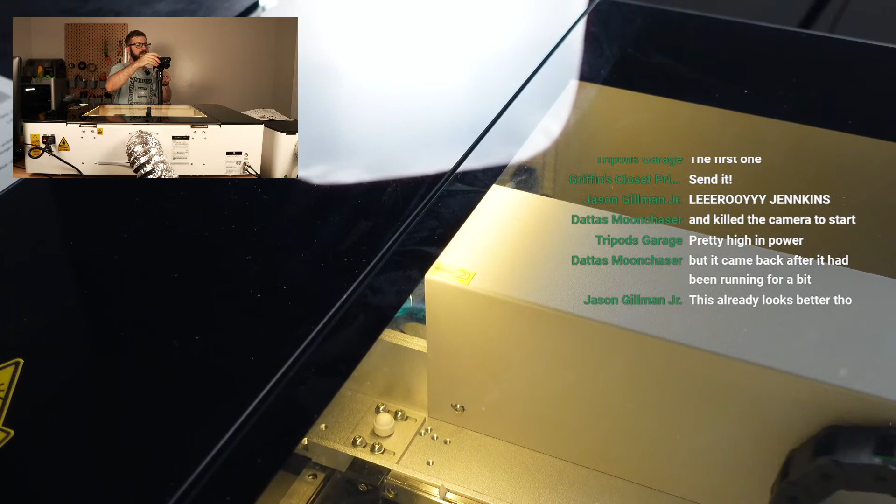See if you guys can see it. Oh, there's a nasty glare. Let's see. Can you see the tube? See it firing? It's pretty cool. Definitely getting a bit smokier in here with this engraving. That's a toasted band. Or toasted bus. Oh man. Whew.

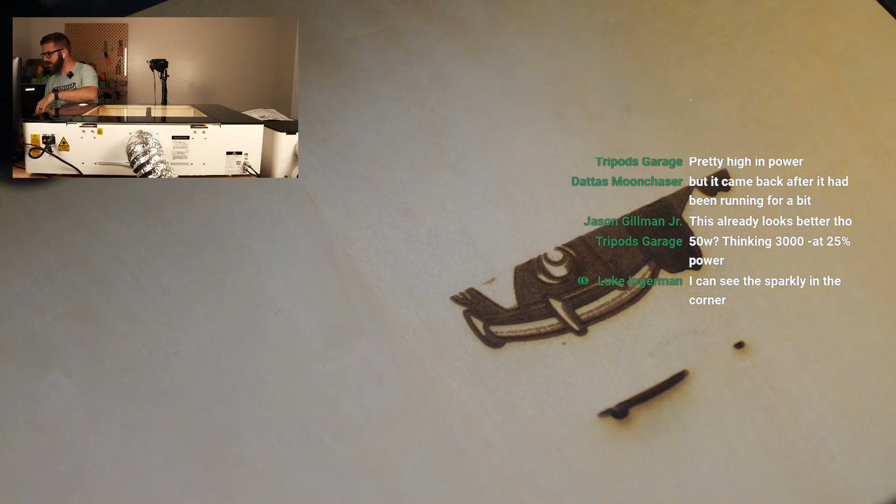Alright, we're gonna stop it again because it is way too charred. We're making some progress though. 3,000 at 25% power.

Wait, faster than 3,000? I wonder if they have - one second here. Oops, nope. Gweike Cloud recommended material settings. Wonder if they have any parameters.

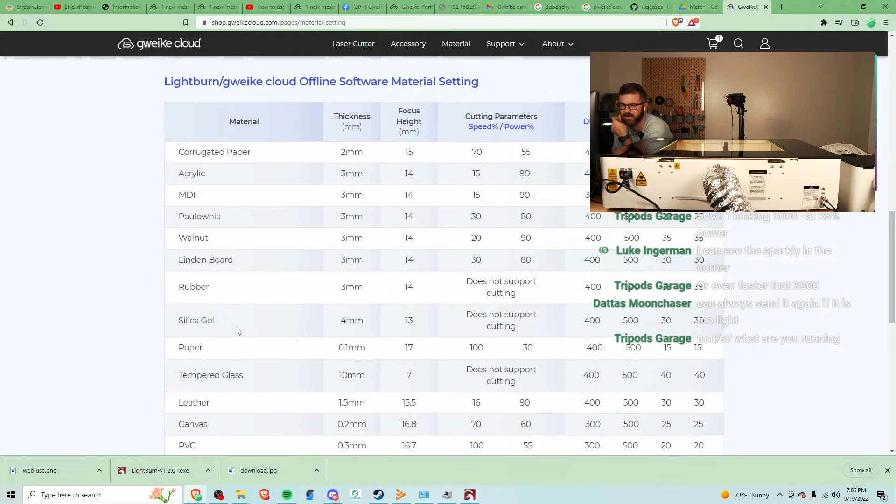Sweet. All right, so we're doing what? Basswood? Oh, cool. So they have it for... Nice. So we are doing wood, maple board, mother of pearl, marble, fiberglass, acrylic, cork, canvas, leather, paper, rubber, linden board.

I guess the closest would probably be MDF. So I think a couple things. One, yeah, I'm running millimeters per second tripods. It was on millimeters per minute, and then I swapped it over. Yeah, I haven't had an adjustable line interval, number of passes, min power, speed. I believe it's under move that we set it. Distance. Yeah, I believe this is what we're doing. No, that's for manually moving.

Okay, this is just showing you the basic designs, but I want to see if they show you... Oh wait. No.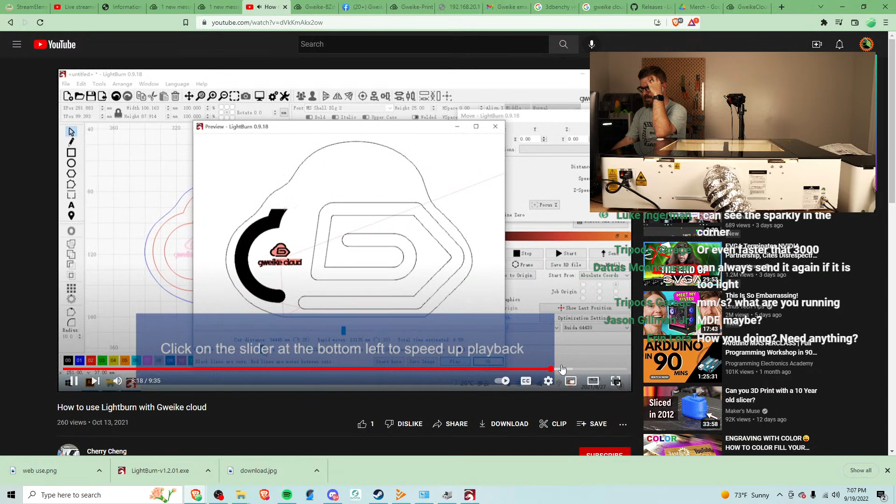Hey babe, I don't think so. I mean, we're getting close to... what time? It's 8 o'clock. We've been live for 2 hours or 3 hours? 2 hours? Okay, a little over 2 hours. I'm okay, thank you, yeah I'm okay. It's kind of smoky in here.

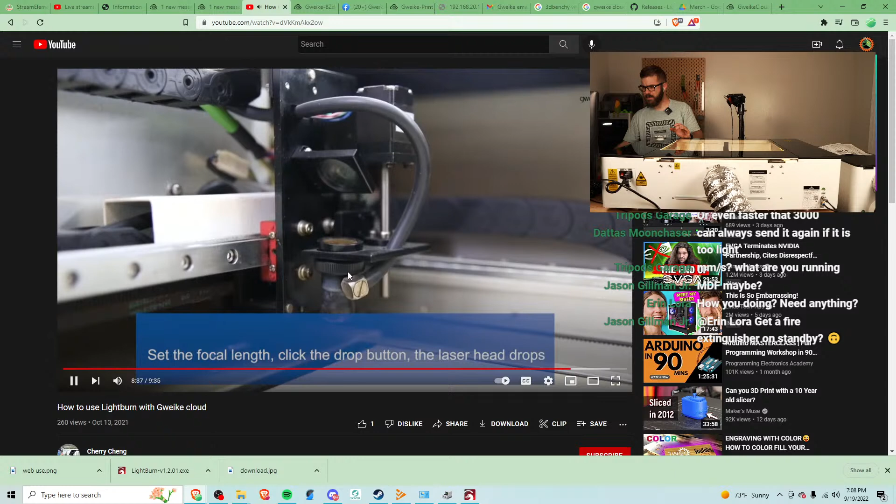Oh, here we go. Okay, so it says focus. Focus settings panel. Set the focal length, click the drop button, the laser head drops.

I'm confused. Okay, so it's saying... set the distance there, then move Z down, and set that as... okay, we're gonna try it.

So let's go 14, and then pressing the down button, which maybe did a thing. All right, I don't entirely know. I'll have to play with that more as well. I've never had an adjustable one, it's always been manual, adjusting the laser height.

Okay, so let's see this. This is speed. That must be cutting settings. Oh, engraving, yeah. Okay, so DPI, 300 is fine. Oh, DPI speed, so 500.

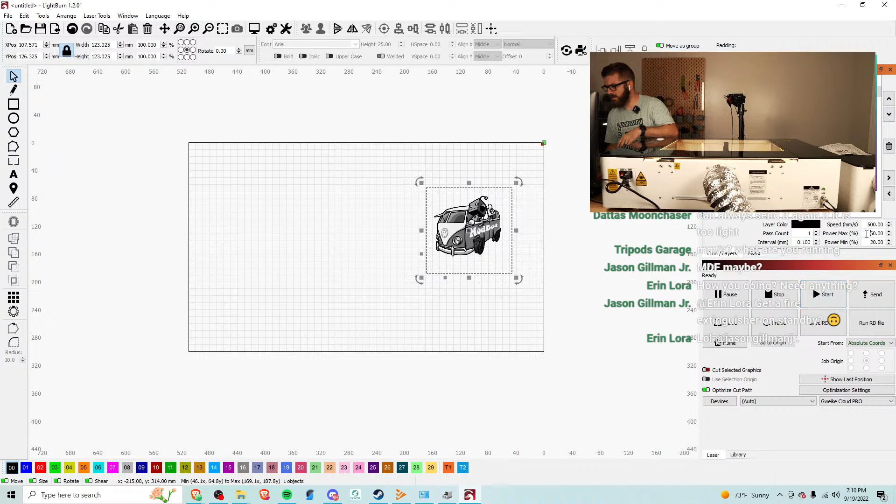And then min power, max power. Okay, so 25. I think that was spot on with what you said, right? Tripods, 25? Or 20? You're right there. But I also need to increase the speed. Okay, let's try it one more time.

Start. I think I goofed. Yeah, so it's not doing anything now. And I have a feeling that the reason is because of the Z height.

I think I have it out of focus now. Okay, so stop, move, home. And it said to do this, and then this, and then this. Let's try it again.

There was a problem sending data to the laser. The machine may be busy or paused. Oh, interesting. Laser disconnected? What?

Yeah, nothing is firing. If I go to the preview window, okay, that still seems good. So it's definitely something to do with the focus. It's the only thing that makes sense.

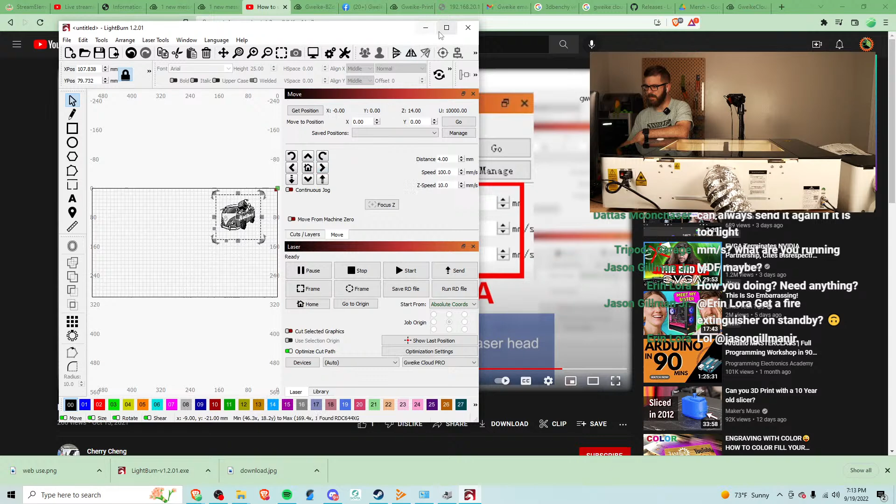Hopefully that'll put us at 14 in a second here. It's not, why is it not? Okay, now it says that it is. It's weird, it doesn't update. I'll have to play around with that more. Let's try to run it though and see. I think I'm at the correct height.

Yeah, okay. Now it looks really light. Nope, that's me. Way lighter than before.

But I guess that's probably more accurate or more correct for the engraving of what we want, because if we look at their setting for the portrait of the spool bus, that's about the same color as what that's engraving now. So that was way charred. We were going way too slow, I guess, and I had the power set way too high. So this seems better.

Sorry guys, it's tripping out. Let it do its thing.

So the goal is to have it engrave this, and then hopefully cut it out, and then we'll probably call it. But I'm super happy we got it working with LightBurn. Once I get it in its place, I'll get the camera, swap it out for the USB cable for it, and get the USB calibrated with LightBurn. Yeah, that's looking way nicer.

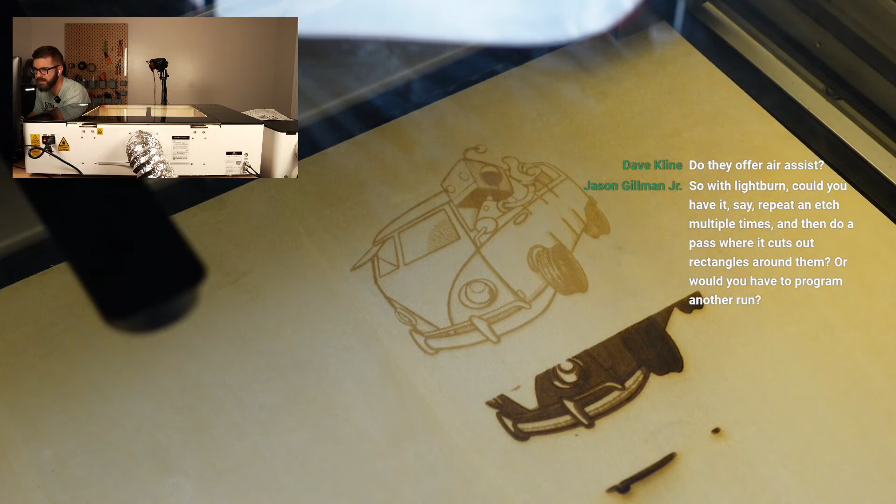Sweet, all right. So I traced it in the exact same spot, so I'm hoping, because we're using absolute coordinates, we should be able to cut this out. Based off what we saw earlier, we should be able to cut it out in one pass. So let's go, we want line mode, and based off their parameters, they're saying a speed of 15 millimeters per second, which is pretty damn slow, at 90% power. So let us try that.

Speed 15 seems awfully slow, but it's probably gonna cut. I imagine the power is gonna cut out. Yeah, no problem, dude. All right.

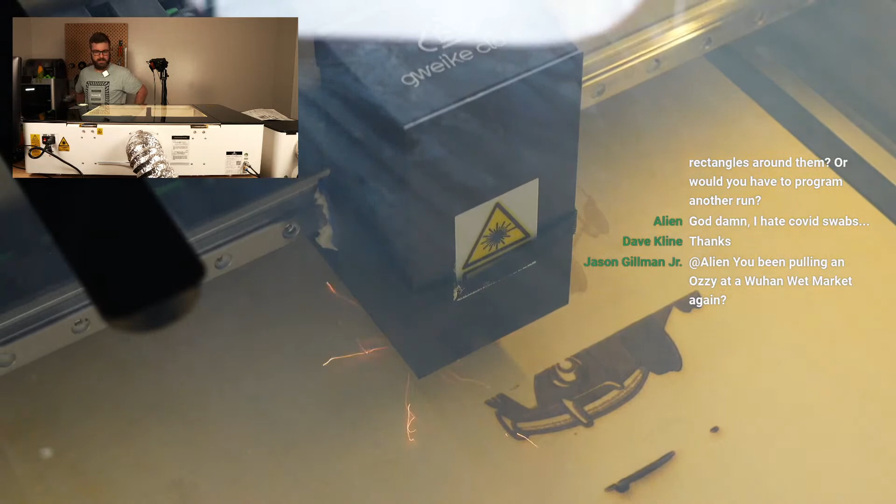Ooh, that is a lot of smoke. That fan does a great job, though. There's still a lot of smoke in here. Ah! I'm worried that the smoke detector is gonna go off. Hold on.

I don't think that was the best setting for cutting. I mean, I think we cut it, but I think it was unnecessarily overkill. It also looked like it charred the outside pretty bad. I think we could have gone with less power, or a bit quicker speed, because that was definitely very charred.

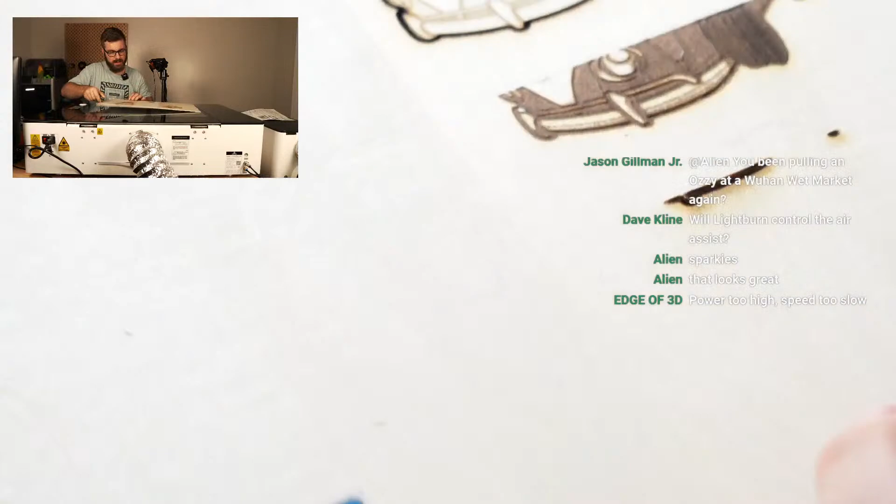All right, let's open this. Should kill it. It didn't cut it. Womp. Yeah, that wasn't... it could have been a height thing too, because of the speed it was going at—that was a pretty big... oh, it did cut quite a bit, just not all the way through. But yeah, that didn't seem right. Compared to how it was cutting the square earlier, it just seemed off.

Well, except for my char job, the actual engraving itself looks pretty nice, I think. But yeah, that outline was nasty. What I'm gonna do is once I get this set up in the garage, I'm going to take these materials and run a test grid.

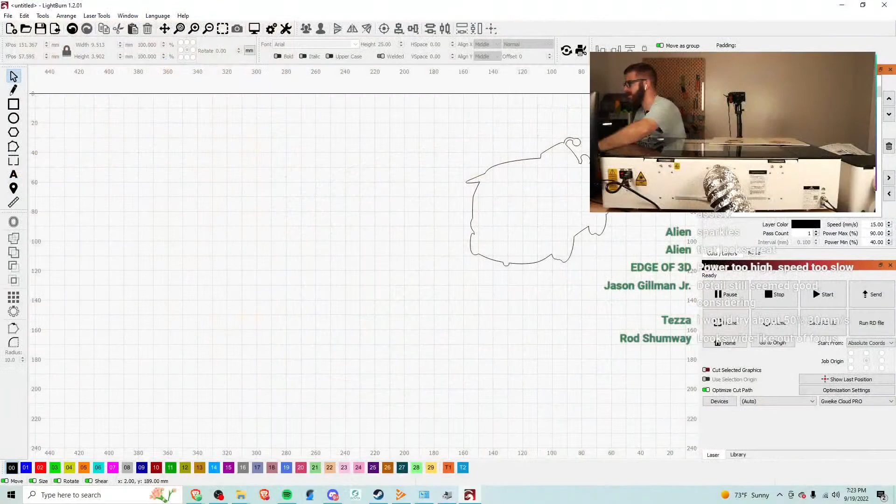Yeah, it looks out of focus. I wonder—oh, I bet you I know what happened. I'm almost positive I know what happened. Something tells me that because it's homing after the job completes—well, it says Z14 there—something tells me that when it homes X, Y, and Z, the Z would have gone back to 0. So it would have been 14 millimeters too high, out of focus. I have a feeling that's what it is.

That makes sense, because the line should have been much narrower, and the squares we cut using their cloud software cut right through, super clean cuts, and we were going maybe faster than that, but certainly not slower. So yeah, that makes sense. Power too high, speed too slow. Yeah, I do think power was probably also too high and speed too slow, but I think it was out of focus, because that is a very, very fat line considering it was only a single pass. It doesn't make sense unless the beam was too far.

Wood is difficult to look nice. You're always fighting the grain—the closer the grains are, the better the engraving. Oh, good to know. Yeah, most of the engraving I've done lately has been either on metal, like a lot of metal business cards, tripods with the fiber stuff, and then some acrylic as well. Black acrylic looks really nice when you engrave it. But yeah, what I'm gonna end up doing is running a bunch of material tests, basically creating a grid of 10 by 10.

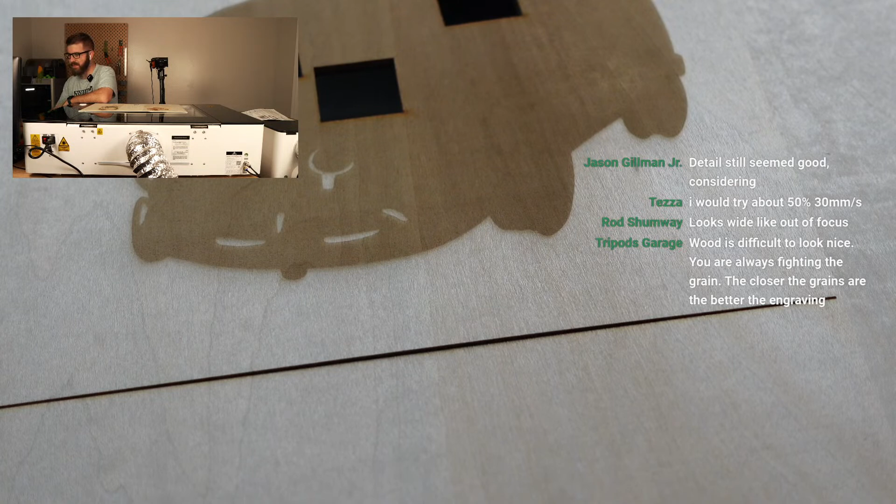So this is speed. If I'm doing engraving or cutting, I'll probably do both, but let's just say engraving starting at 200 millimeters per second up to 500 millimeters per second. Then a power count, like you can do a power scale, and it basically will create a grid with your settings, and that way you can dial in each material.

And then in LightBurn, they have material libraries. So once you find, like for 3D printers you have different slicer settings for different materials. We're under the Gweike Cloud Pro profile, and under the library you can create a new material, create a new set from a layer, or create a new speed and power setting from there, so you can load and save them. That's what I'll end up doing, finding what works best and then doing that.